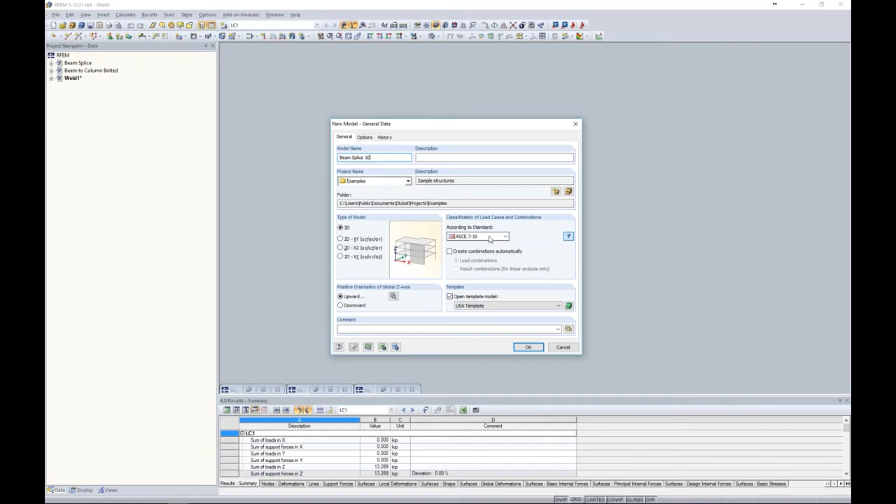To begin with, we want to start off with a beam splice connection. So I'm going to title this model Beam Splice 10. The type of model is 3D, and we can generate load combinations automatically here according to a specific standard. We're not so concerned with the load combinations and design today, so I'm just going to manually create a load case, and we'll just keep that pretty simplified. Once we click OK, then we can launch our new file, and up pops in the center here our graphic drawing or a graphic dialog box.

We also have our tables to work with down at the bottom. What's nice about this is that you can import and export directly to and from Microsoft Excel if you prefer to work with Excel spreadsheets. We do have our tools to work with up here at the top, and we will certainly be utilizing those today. Over on the left-hand side, we have our project navigator, which I think is a little bit more unique to our program. For example, the data tab, which we're currently looking at, will provide us with all of our input data. You can see our long list of add-on modules is listed here as well, which we won't be getting into today. The display tab is going to control everything we're viewing graphically within this window, including our results. So typically if you want to turn on or off something, or maybe change the color when you're looking at results or how it's viewed, everything will be done within this display tab.

Our views tab is where we can create user-defined views. As we begin to generate this model, we'll also have some views that are generated by the program automatically. And finally, once we run an analysis, we will have a results tab available here.

To begin with, we want to start off with a typical beam member for the first part of our splice connection. So I'm going to draw in a new member, and I will open up my cross-section database. We have our rolled cross-sections. Once I launch this, I will just see my AISC shapes listed here. I'm going to scroll down to utilize a W12 by 35. Now, steel A992 is one of the default materials within the program whenever we first create a new model, so we will just stick with this for now.

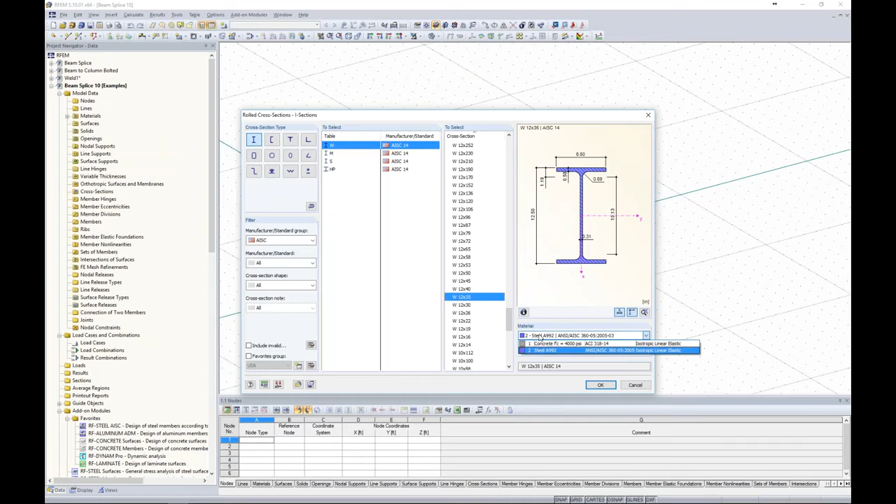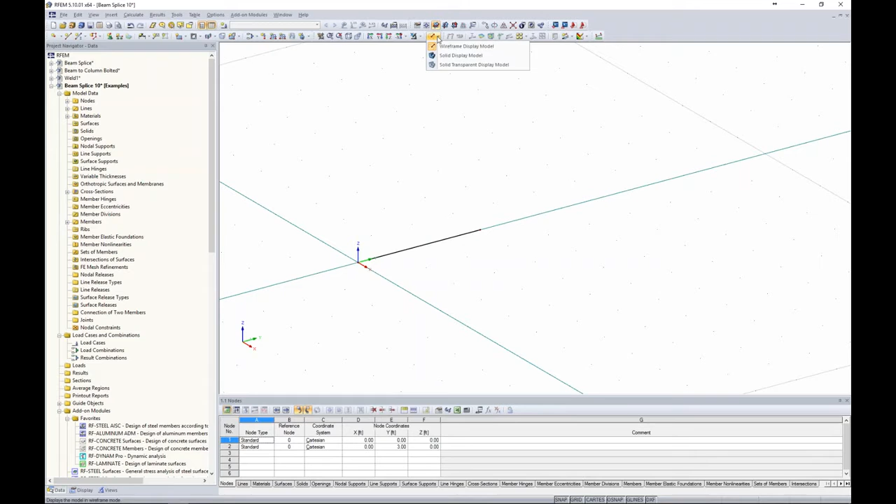By simply clicking on two points, one at 0,0,0 and the other at 0,3,0, we've created a short beam segment here. Now when I turn this into wireframe view, the thing to note is that members are 1D elements, so the wireframe view is just modeled by the center line. If we turn this back into a rendered view, of course all of these cross-sectional properties will be taken into account for the analysis and design.

But if we're interested in something like the stresses on the flange versus the stresses on the web, you really can't view those different stresses on different components of the beam because it's being modeled by this simple center line. Now what we can do is right-click on this member and utilize this option, Generate Surfaces from Member.

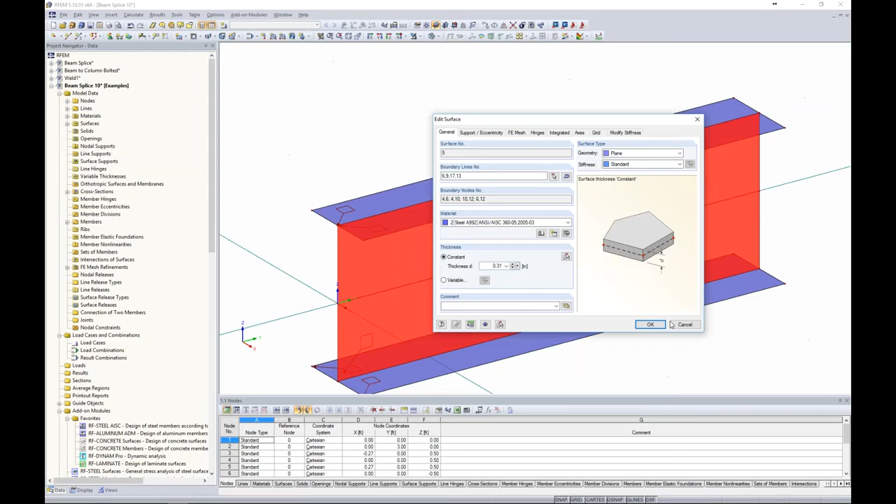So I've converted that 1D member element into 2D surface elements. We have a surface element now for our upper flange, for our web, and even the lower flange. When I double-click on the web, you'll notice that steel A992 is still populated, and even the thicknesses are taken directly from that W12 by 35. So this is a very useful feature when we want to generate surface elements from those 1D member elements.

Now the next thing to focus on would be our plate that we're welding this W shape directly to. I'm going to change around my drawing grid here, and we will snap to the front of the beam to change our origin, and we'll also change the plane here. Now when I look at my drawing grid, the snap points are set at every foot, that's just default. So down at the bottom of the screen, when I right-click on grid to edit it, you'll notice those grid point spacings are set at every 1 foot, as I just mentioned.

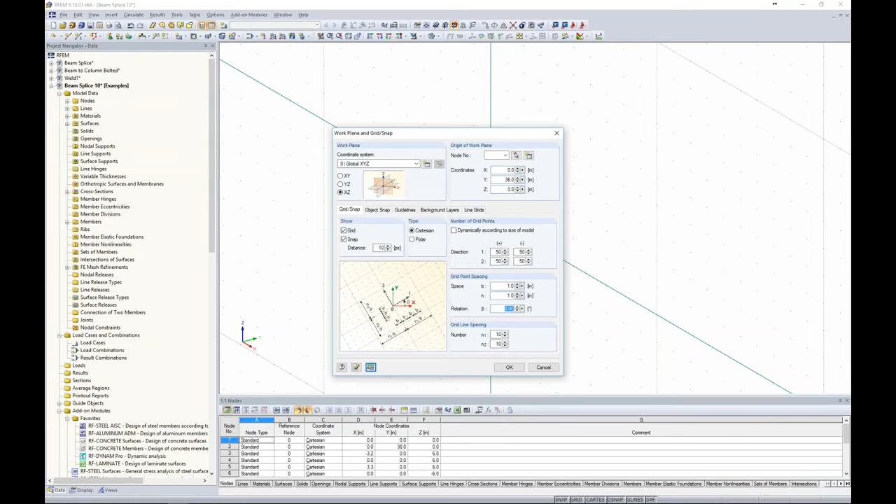We can open up our units options and automatically change this to inches instead. So now you can see that instead of 1 foot, I'm seeing 12 inches, and let's decrease this to every 1 inch. I click OK. So now you can see my drawing grid is much more useful when we're working on a much smaller scale, such as a connection. I'm going to orient the model here, so now we're looking at our W shape within the page, and we want to draw our plate element.

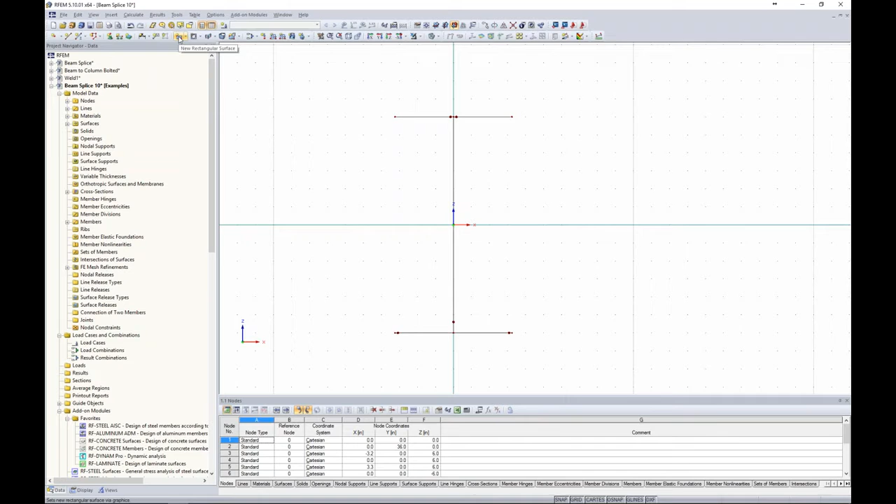I'm going to utilize this option, a new rectangular surface. So when I click this option, again this is a surface element, just like what we saw when we converted our 1D element into our 2D surface elements. I want to create a new material here, and using my filters over on the left, I can filter to metal, to steel, to the ASTM, and you can see here we have our long list of ASTM materials. Now I can also utilize a favorites group.

Favorites group is just where maybe I place a few of these materials, for example what I'm using in today's webinar, so that I can quickly have access to without having to sift through that long list. So steel A36 will be the material we select here, which the material properties are populated down here at the bottom so that we can view those. The thickness, we'll set this as 0.25 inches. I click OK. So all I'm doing is just snapping from one corner to the other, and I turn this into an isolated view, just a surface element.

So the next thing that we would like to do is to place those openings for bolts. Up next to these surfaces, we also have the option for openings within surfaces. And you can see here we don't have just typical shapes like a rectangle, but we also have circles, parallelograms. You can even draw in your own polygon. So this is very efficient when you have some type of odd opening within a surface connection, it's really no problem to model that.

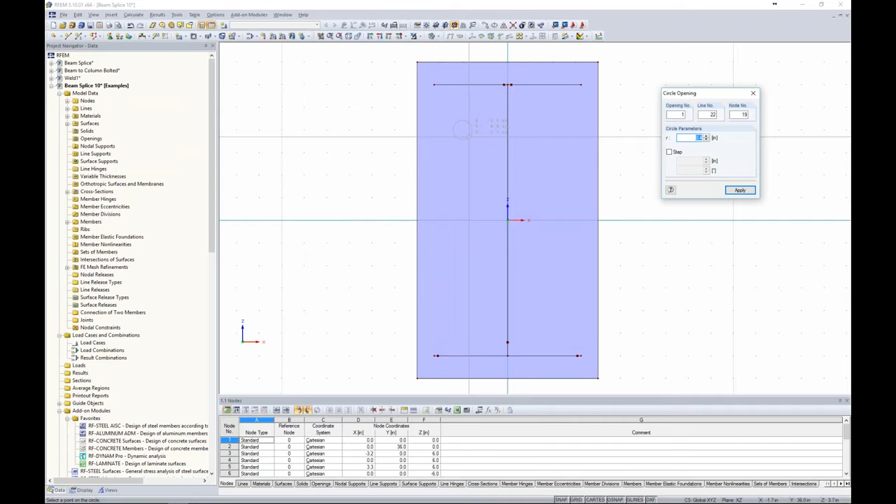For us, we will stick with a circular element though. So we just simply snap to the center line of that opening, and we can either snap to the radius of where we'd like to place that opening or type in 0.28 inches and click enter. So now that opening was automatically created within that plate element. I'd like to do the same thing at the bottom here, and I just snap to the center point, type in 0.28 inches, and I have the two openings on the left-hand side.

Now, zooming in here to this opening, realistically, we're going to draw a plate right next to this one with an additional beam. This is a beam splice. And in order to hold the plates together, I want to draw some bolt members that are going to hold those plates together when they're in tension.

Those bolt members we'll get into in just a minute, but what they're going to do is frame into right in the center of these openings. Now, they're 1D member elements, so the question is, how do we connect those 1D member bolts right here in the center to the rest of our plate surface?

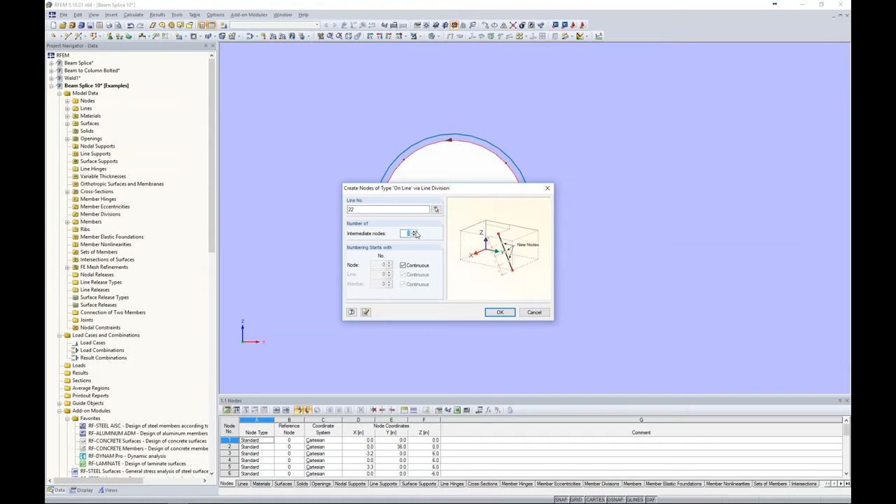Well, the answer to that would be small little rigid links. So what I can do is right-click on this line, and I can create a node on the line and intermediate nodes. Maybe I select 3 here. I click OK. So now I have 4 nodes located along the line of this opening.

I go to draw in a new beam member, and this time the member type will be rigid. You'll notice the cross section is automatically grayed out. That's because for a rigid link, the stiffness is set to an infinitely high number, a very, very high number, so the cross section is really irrelevant here. It's really treated as a coupling member.

But what we can do is adjust the member hinges. So when I create a new member hinge, you'll notice I have my 6 degrees of freedom, translation and rotation, but we also have partial fixity. So if we don't have a complete release or fixity of one of these 6 degrees of freedom, we can put in here a spring constant.

And lastly, if you would like to get into nonlinearities for any of our 1D member elements, you can do so. So if we didn't have a full transfer of a moment, but maybe we had only moment transfer up until a certain value, well, you can set all of that with these options here. For our case, we will leave this as fully fixed.

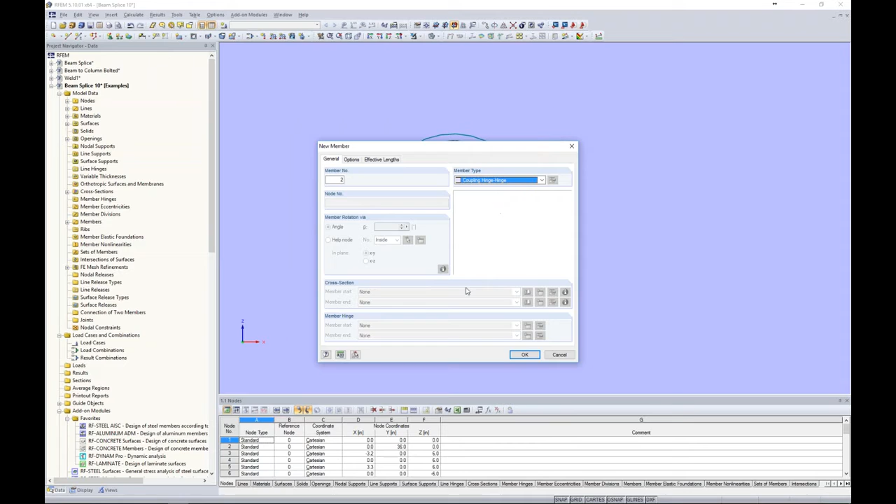Now, something else to point out is that we have quite a few other members down here called couplings. You'll notice we have coupling rigid rigid, coupling rigid hinge. When I select one of these, my member hinges are now grayed out, and that's just because these are some quick access tools to get to a rigid link with those member ends already defined. For example, a hinge would automatically release the moment at either side. So same process, just a little bit quicker so that we don't manually have to define these member ends.

Now, a rigid type with the member hinge set as none means that it's fully fixed, and we can simply snap to the center line of this opening to those 4 nodes that I created. Now, in reality, you would maybe want to create several more rigid links here, but for example today, just keeping it simplified, 4 will be plenty.

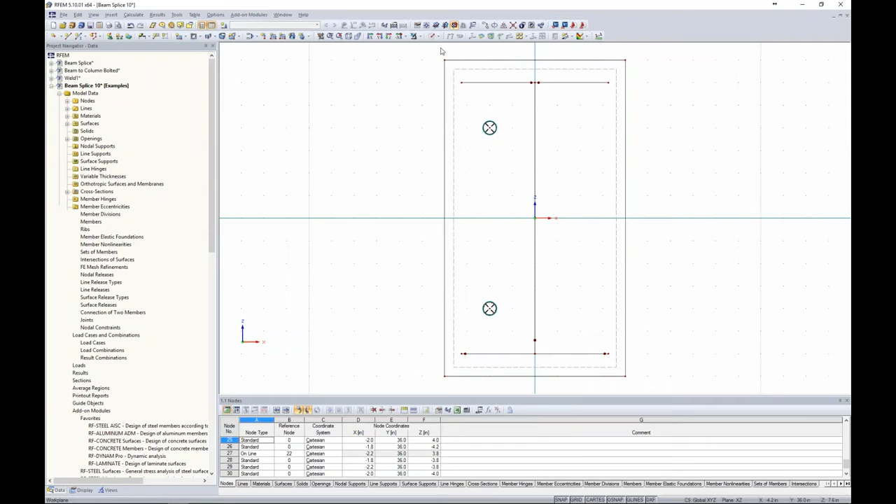So what we can do is highlight those 4 rigid links, hold down our control button, and simply snap to our bottom opening to create the rigid links within the bottom there. So now that we're done with the 2 openings on the left, I can turn this into wireframe, select both of those openings, and once again, just making a quick copy, I hold down my control button and utilize the drag and drop feature to make the other 2 holes on the other side. And turning this back into wireframe or rendered view, we can see those openings there.

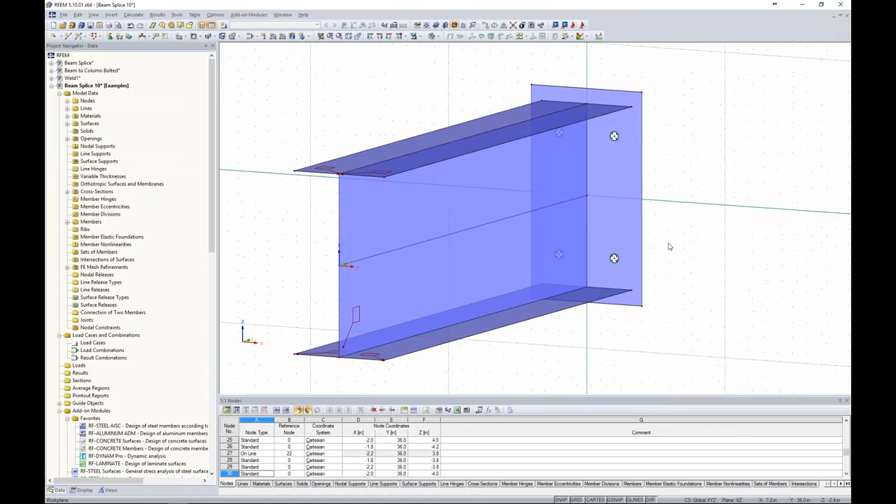Okay, so moving on, we currently have our 1D or 2D plate element drawn here. What we'd like to do is convert this into a contact solid. So the first thing I would like to do is right-click on this member, and we have this option to extrude the 2D surface into a 3D solid.

So here I can type in the height of the solid. Now this is important. If I have a 0.25 inch thick plate on the left-hand side and a 0.25 inch thick plate on the right-hand side, the height of my solid needs to be the sum of those 2 thicknesses. So in our case, this would be 0.5. Now in turn, if you had a 1/4 inch thick plate and a 1/2 inch thick plate, well then that would be 0.75. So you just want to add those 2 together to come up with the total height when we're looking at something like a contact solid.

The other thing to notice is that we do have the surface type selected here where the extruded surfaces will be set to null. So once I hit apply, let's take a look at what the program has done here.

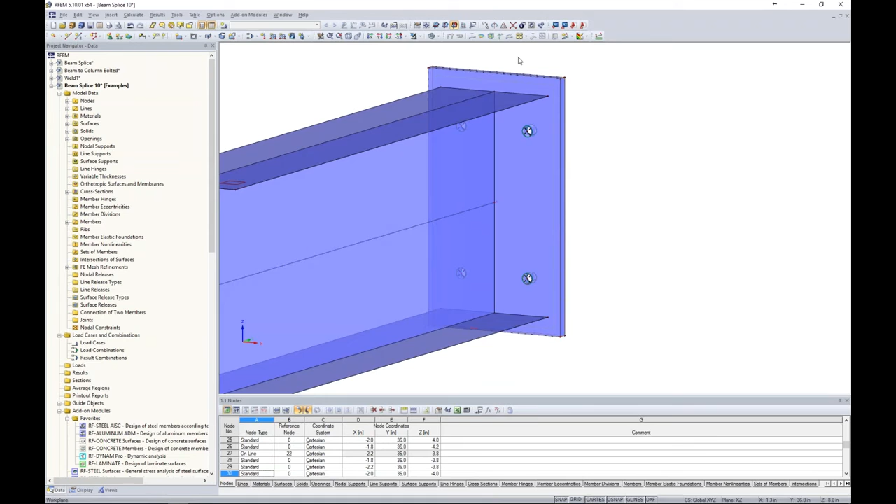It's created a solid element, so now we have a 3D element rather than a 2D element. We can see that those openings were carried through. That's all great, but when I'm looking at my surface elements, the solid is comprised of surface elements on every end.

And that plate that we just defined, if I double click on it, it was automatically set to null. That's what that checkbox did when we extruded this into a solid. So we want to change this back to standard, and we've already defined steel A36 within the model. The thickness is remembered at 0.25, so I click OK.

Now the exact same process needs to be done on the back side of this solid. So selecting my back surface element here, we're going to change the stiffness to standard. Steel A36, 0.25, that's great.

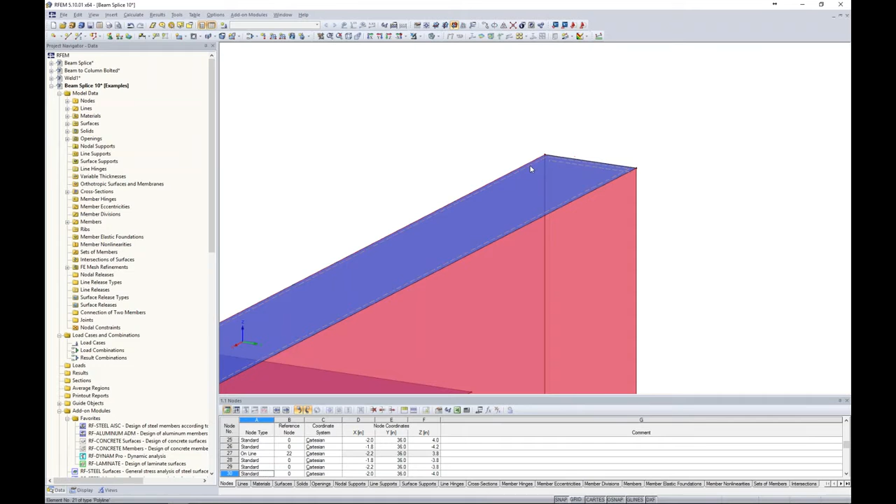But you'll notice that at the top, these narrow sides, I still have my surface elements here defined as null. So around these smaller edges, we're going to keep all of those with 0 stiffness.

So we currently take a look at this solid, and it's indicated, if we turn this into wireframe, it's probably a little bit easier to see by this purple node right here in the middle. We can double click on it, and you'll see here the solid type is set to material. So this just means it's a typical 3D element within our finite element software.

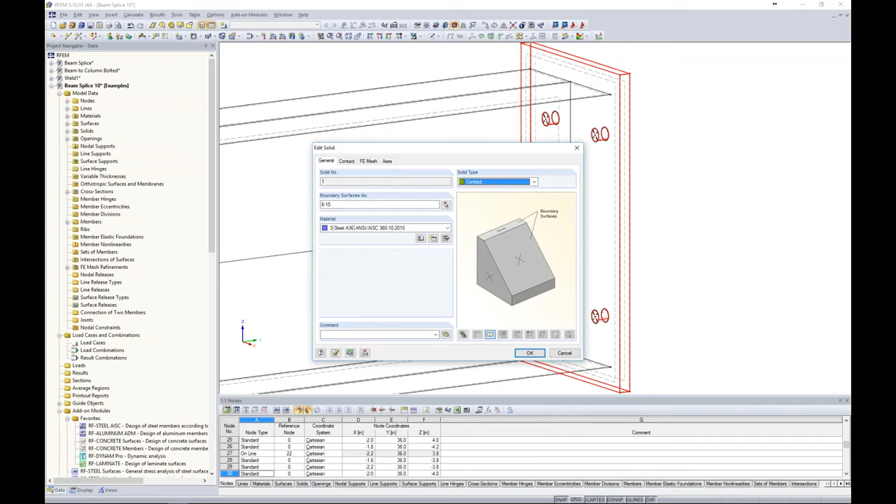What we would like to change this to is a contact solid. So we just utilize this drop-down box, and now we have a contact tab here. So I want to jump back to the PowerPoint to discuss a few recommendations and requirements for contact solids.

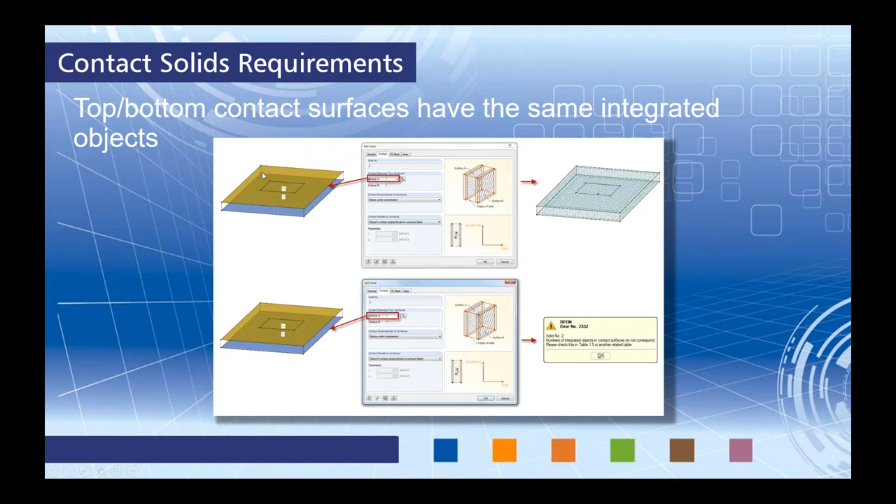So going back to RFEM then, what does this mean for us? Well, if we take a look back into the model, you'll notice that we have these line elements here, which are shown from framing our surface elements from our W shape.

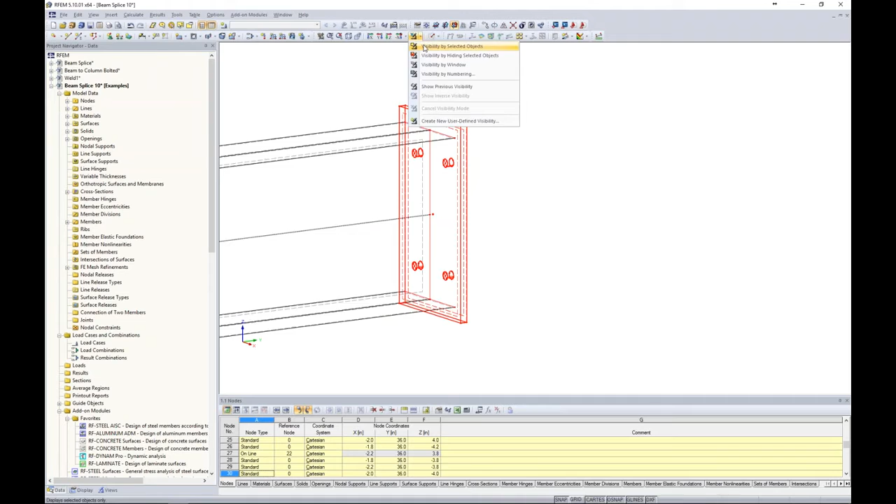Maybe I want to take a look here of just the plate elements, and we'll make a visibility here just based on these selected objects. So what I need to do is I actually need to copy these same exact elements to the back side of my surface. So I can do so by selecting them here, by highlighting, and I can hold down my control key. I even need to make a copy of that center node right there.

So taking all of these elements, then I can rotate this around, use my Move Copy tool, and I can make one copy in the global Y direction of 0.5 inches, and I click OK. So now you can see those lines and nodes are identical on each surface.

This plays no part in the fact that these surface elements are out here for my beam, but if we didn't have a completely symmetric connection here, this is what you would need to do, otherwise you will get an error.

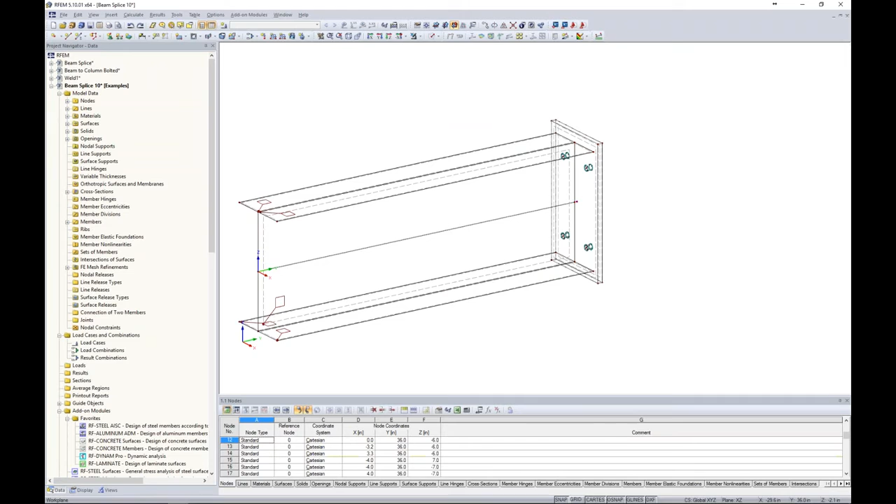In contrast, we're going to make a copy of this beam on the left-hand side to the right-hand side. We can select all of these elements and utilize our mirror tool, exactly like what you would see in AutoCAD. We'll create one copy, mirror it about the global XZ axis, and graphically choose a point in the center of our plate to mirror that. We click OK, and now you can see that those lines and nodes were automatically generated when we mirrored our entire beam section to the other side.

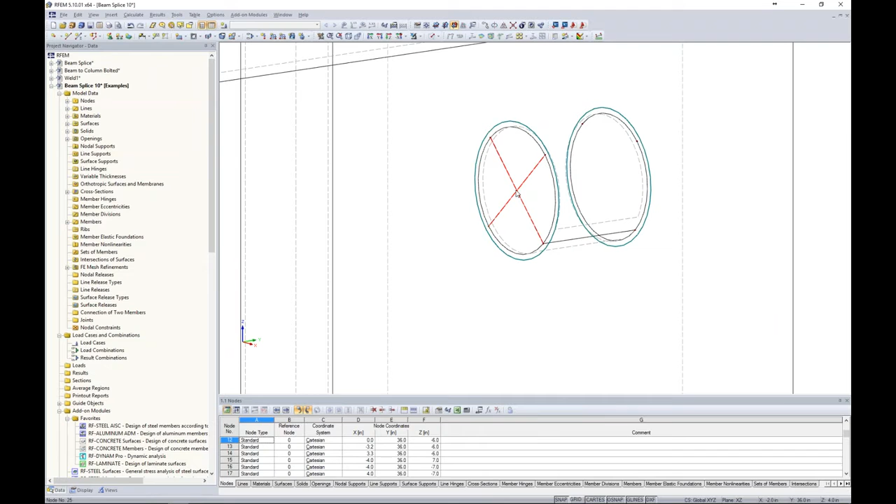A couple other things to note here. If we zoom in, it looks like our rigid links were not copied over when we extruded this into a surface. Well, that's no problem. All we need to do is highlight those, hold down the control key, and snap to the other side, doing so with our opening on the right-hand side. For the bottom, we can even select both rigid links on the left-hand side, hold control, select on the right-hand side, and drag and drop to do both holes at once.

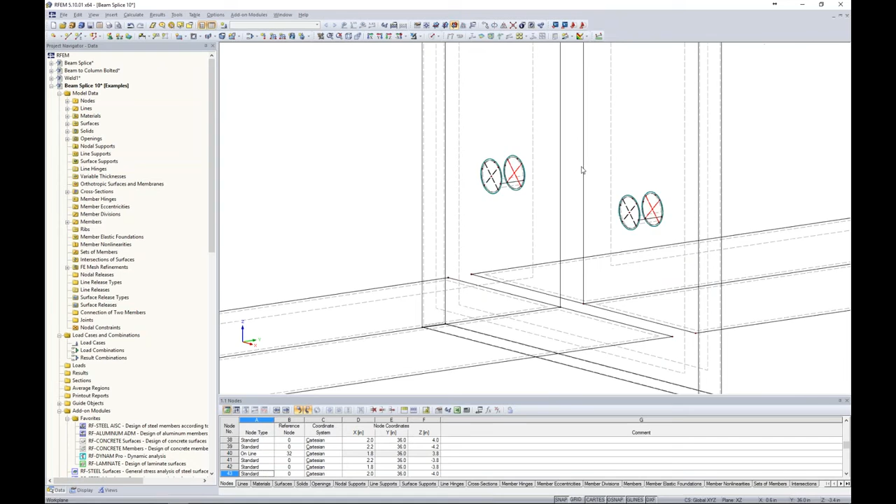So we had those rigid links drawn, but we've done nothing yet to model our bolts. This is where we're going to go back into our member database and select a typical beam type member for our bolts.

I want to create a new cross section by going into my cross section library, and under my thin walled sections, I have the option for a round bar. With a round bar, all I want to do is define a diameter of 0.5 inches. This is representative of my bolt diameter.

I do want to create a new material, so utilizing my favorites group again, I have added steel A325 to my material database. This was a user-defined material where I've adjusted my properties to match steel A325 directly from the AISC or the ASTM. I click OK.

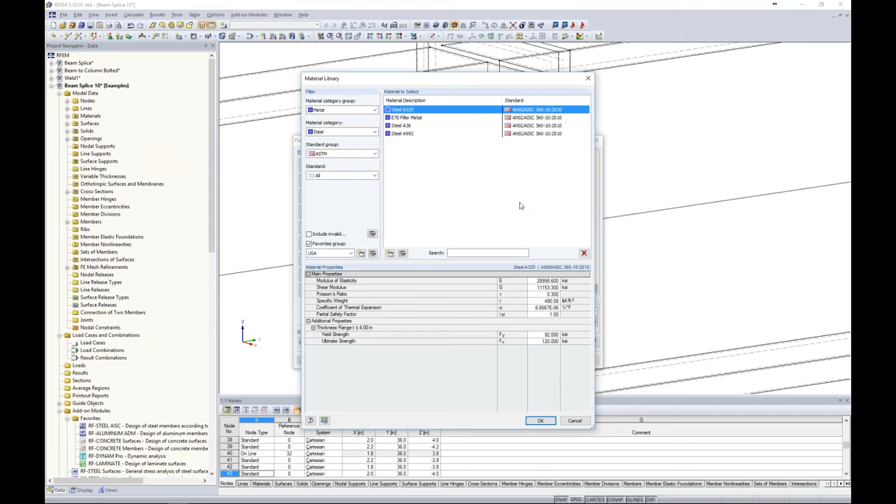I click OK again. Now the member hinge, I'm going to leave these as fully fixed. I'm going to assume that the bolts and nuts are tightened such that I'll get some moment transfer between those bolts holding those two plates together.

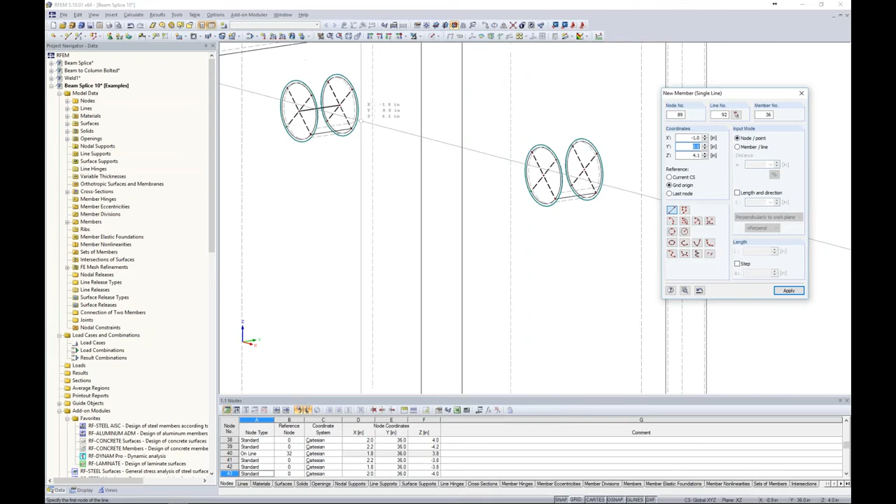I click OK. Now all I need to do is snap to the center points here between my rigid links. So hopefully it's a little bit more clear why we created those rigid links in the first place, in order to tie these bolts back into our surface elements.

Once I'm done with this, I can right click to exit that dialog box, and let's take a look at the rendered view. So now with our openings, those are still shown here, but the rendered view of our bolts shows that circular short member in there to represent the bolt members.

Okay, so now that we've pretty much modeled all of the geometry, the next thing we want to do is discuss the behavior of our contact solid. Double clicking here back to our solid, remember that under general we specified the solid type as contact, so now we have a contact tab available here.

The program automatically determined what surface A and surface B should be. These are our 1/4 inch thick A36 plates. Sometimes you may have to come in here and manually define this, just depending on the modeling steps that you take, but most of the time the program is smart enough to recognize what surface A and what surface B are.

Now the next two entries are going to define the behavior between these two surfaces. The first is the contact perpendicular to the surfaces, and for this we have three options. The first is full force transmission, where all of our normal forces and stresses are going to be fully transmitted between surface A and surface B. The second option is failure under compression.

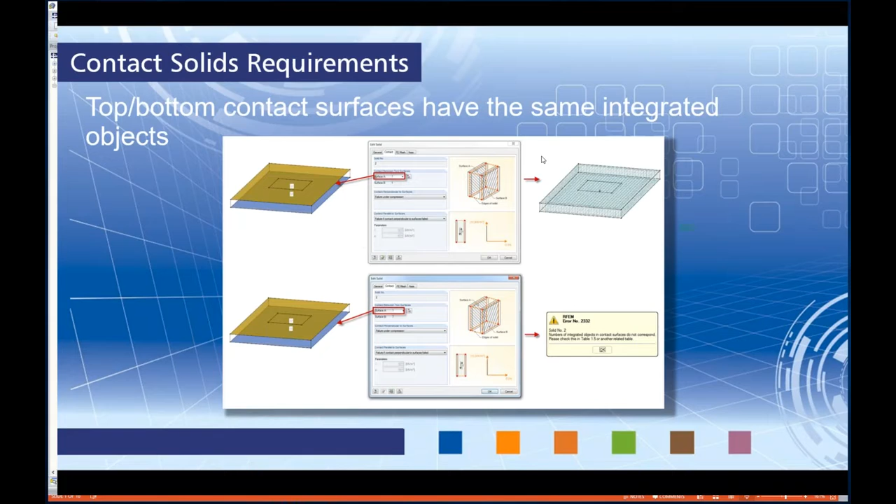The first option is failure of contact perpendicular to our surfaces. So we just set the option for the perpendicular behavior that it would fail in tension, and the option parallel to surfaces then would also fail whenever we have tension within our plate. It's just a relationship between those two behaviors.

Full force transmission - this means that all shear forces will be transmitted, despite whatever is going on normal to our surfaces. We'll always have full transfer of those shear forces.

Rigid friction is what we'll be utilizing today. This is where we'll be given the option to enter a friction coefficient factor mu. As we know, shear forces can sometimes be dependent on our normal forces times our friction factor mu, so that's what we'll be utilizing today.

The fourth option, rigid friction with a limit - same type of concept, however we're no longer given the option for a friction coefficient factor, but rather a tau max. What this is saying is that we will have full force transmission between the two surfaces up until a certain value, tau max. At that point we'll lose that contact and won't see any increase of those shear forces or stresses.

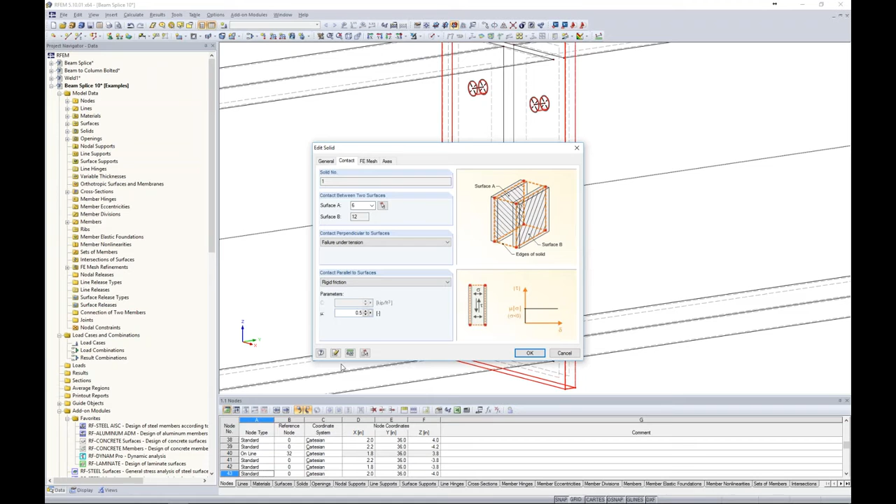Going back to the model, when we take a look at our particular model today, we have failure under tension. And as I mentioned, we will choose rigid friction here. To emulate these two steel plates sliding against one another, we can use something like a friction coefficient of 0.5, and I click OK.

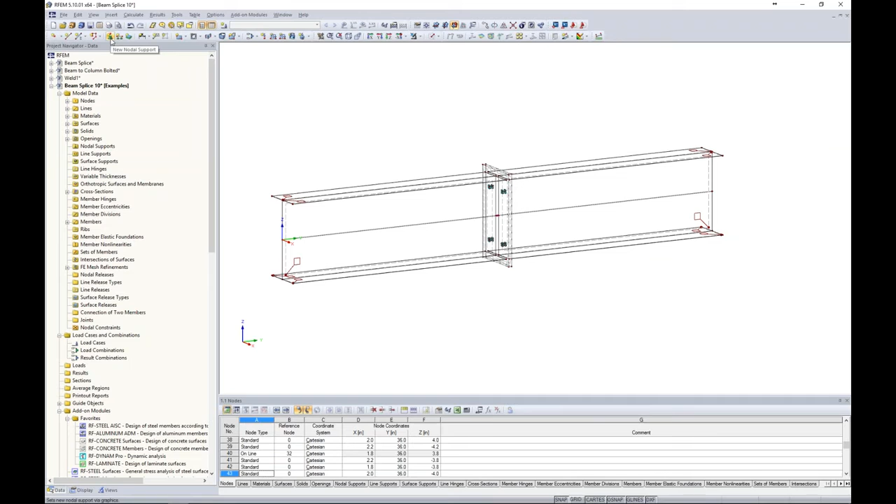So now we have fully defined the behavior between these two plates on the left and right hand side with a contact solid. A few other considerations of course before we're able to run an analysis - the first one is we need to support the model. We have nothing here such as a nodal or line support. You can see our support options shown up here in our tools: nodal support, line support, and surface support.

If we open up the nodal support and create a new definition, this should look familiar - it looks just like what we saw at our member ends. We have our 6 degrees of freedom, translation and rotation, where we can fully release these or fully fix them. We have spring constants here for partial fixity, and again we can get into nonlinearities.

This also allows us to define things like slotted joints - maybe we want this beam to slide up until a certain force and then it will be fully fixed. So all of those options are possible with the nonlinearities. Now for today, we are going to stick with a simple hinged application, so I can simply draw a selection box over the left and right hand side of this beam member.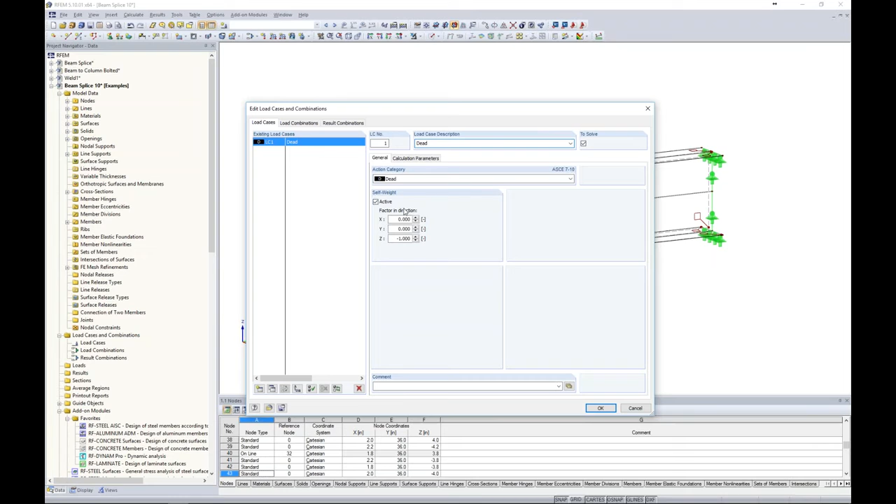The next thing to do would be to load the structure. For this I'm going to go up to my new load case, and like I said, we're going to keep this fairly simple for today, only defining one dead load case. I will leave the self-weight activated, so it will automatically be taken into account with this particular load case.

Now the next thing we'd like to do is apply a line load across one of these members. Intuitively we'd think, okay, let's apply a member load. But remember, we don't have any 1D member elements within this model anymore. We've converted everything to surface or solid elements, so line elements for surfaces or solids must utilize this new line load.

With a line load, we simply specify the load direction in the global ZL direction and give it a magnitude of -50 kips per foot. I click OK, and then I can click to the top of that beam member over here on my left. I think it's perfectly acceptable to maybe not have symmetric loading for this particular connection, but to really see when we have unbalanced loading. So I'm just going to apply my load to my left-hand side and leave the right-hand side without any load except for self-weight.

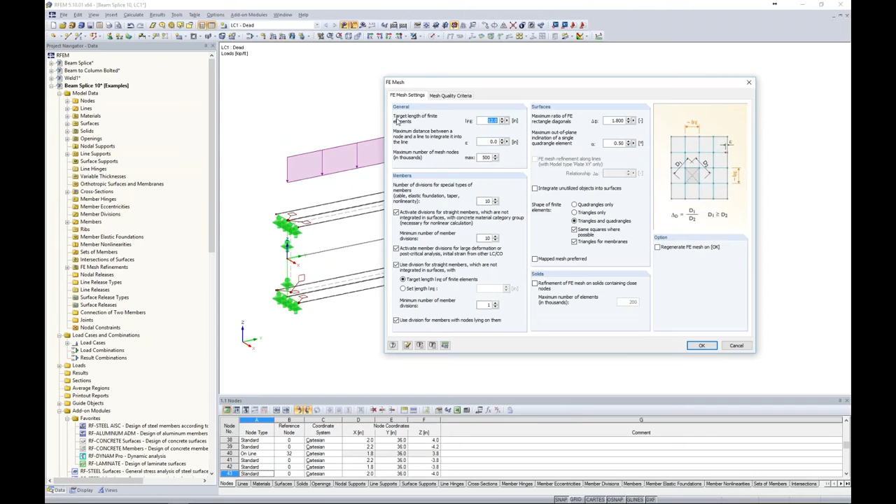The final thing to look at would be our FE mesh. Under calculate FE mesh settings, the global FE mesh is always set to 12 inches or 1 foot. Now, the program was smart enough that when we converted these 1D member elements into 2D surface elements, we are at a much smaller scale now, so it automatically recognized that 12 inches was entirely too big for this FE mesh for these particular elements. That's why it applied these little symbols over here. These symbols just mean FE mesh refinements.

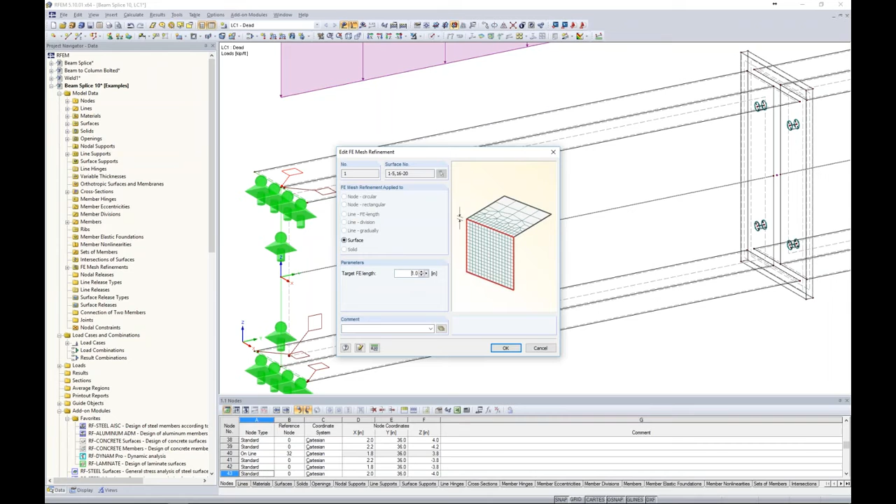If I take a look by editing what the program automatically put in here, you can place FE mesh refinements about a particular node, a line, a surface, or a solid. Now we're applying this directly to the surface here, and the program automatically decided that 1 inch would be much more reasonable than 12 inches.

If we take a look by going to calculate, generate FE mesh, we can see that the program automatically created the FE mesh even at our plate elements where it's required to be much smaller than 1 inch. Everything is done automatically. It's tied to the nodes, the lines, the members. Everything is done for us. But what I do want to show you is that our FE mesh refinements are listed here under our data tab in our project navigator.

So if I were to take that FE mesh refinement that I just showed you and completely delete it by just hitting delete on the keyboard, and let's say we didn't know any better, but just leave the FE mesh settings set at this global mesh, which is currently set to 12 inches. Choosing this option here to regenerate the FE mesh, once I click OK, we can take a look, and I think we should all agree that this is a terrible FE mesh.

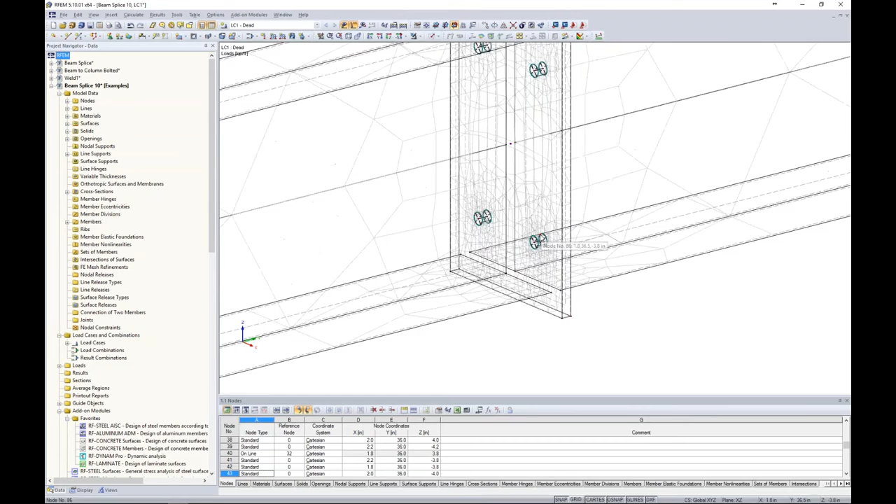This simply will not provide you with correct results because the FE mesh is entirely too big. The program does a little bit of a better job within the contact solid, just because we have elements much closer than 12 inches that it needs to tie together, but out here you can see it's entirely too big. So rather, what we can do is under calculate FE mesh settings, we can change the global FE mesh settings to something more like 1 inch. I click OK, the FE mesh is generated and everything looks much cleaner.

Now there is an iterative process with this. You can continue decreasing your FE mesh size smaller and smaller, and sure, your results are only going to be more accurate. But at some certain point, you're going to be increasing your solution time to be very high in comparison to how much your results are actually changing. So get a better feel for this as you begin to model in finite element software more and more.

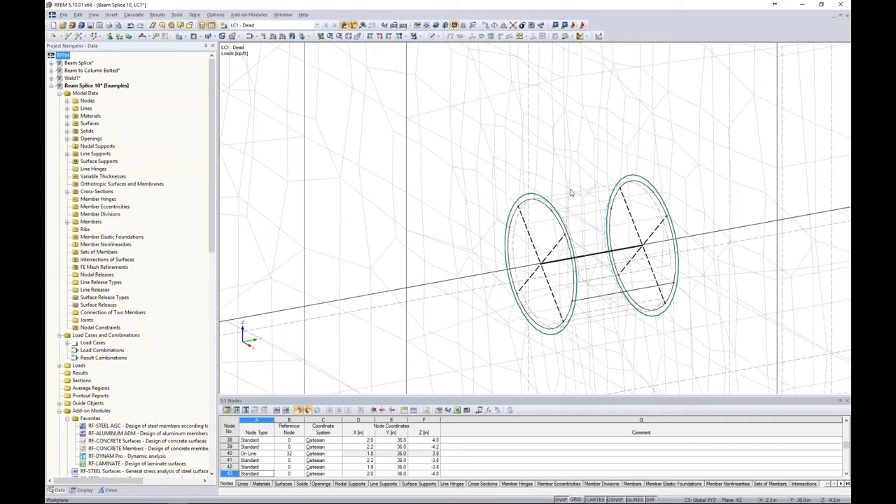The other thing I wanted to point out quickly is just another FE mesh refinement. So if we're zooming in here to one of our openings and we determine we'd like a finer mesh than what's shown here, we can always right click on any one of these elements, and here's where you'll see the option for FE mesh refinement. We choose new, create a new definition type, and now you can see my FE mesh refinement is shown for lines. So maybe my target FE length would be something like 0.1 inches, and I'd like to have 4 layers, and it will transition back into the global 1 inch setting.

I click OK, I click OK. Now the FE mesh was cleared, and I can see my FE mesh refinement symbol, which is noted by these nodes across my line.

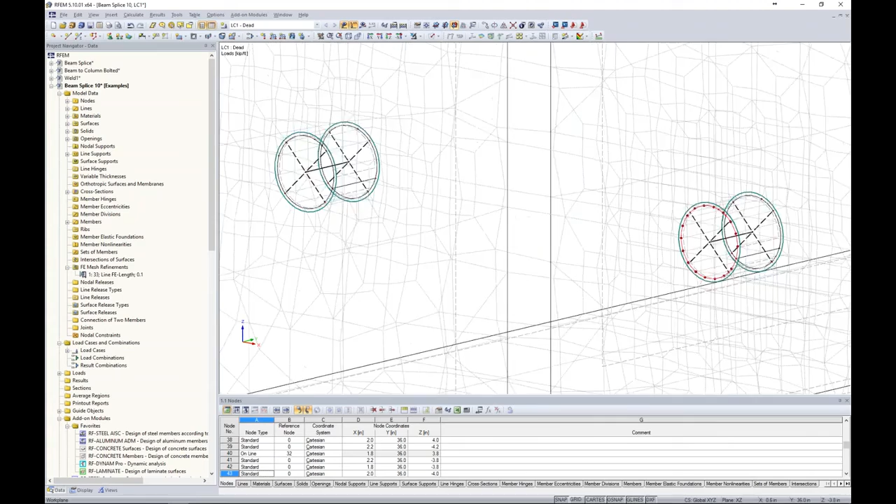Going to calculate and generate the FE mesh. We have a much finer mesh on the right-hand side than on the left-hand side. These are just different options for FE mesh refinement to focus in on a particular area within the model, rather than changing our global settings to something much too small, which really increases solution time.

With that said, I think we're finally ready to run our analysis. The program is going to cycle through this load case, and we've only applied this dead load. A couple other things to keep in mind: this is a nonlinear analysis, so internally the program is going to create these FE elements.

It's actually taking quite a bit of a long time, usually not this long. We can see down here what the program's doing - it said verifying authorization, so it was checking my license. It's a nonlinear analysis program, so the contact solid is going to increase our solution time as well, because of the different behavior we defined between the two plates.

So the analysis has run, and we're automatically brought into our results tab, available within the project navigator I mentioned at the beginning of the webinar. I think the most important thing to automatically take a look at is deflections. Deflections will really show us if we've correctly defined our contact solids, maybe our FE mesh, and if it looks about what we would approximate.

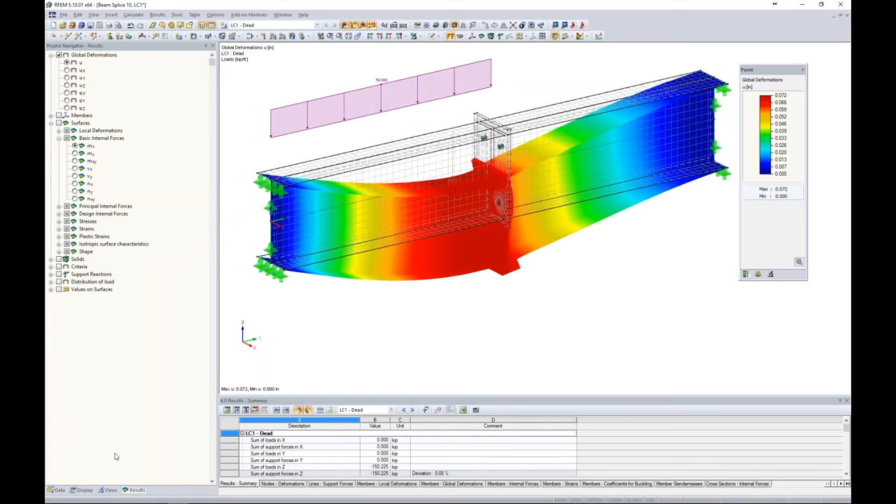It's a little bit difficult here to see our deformations and what's going on. So under our display tab, we have this whole results tree, and under deformation I can actually choose this option to outline my deformed surfaces. Now it's a bit more clear what's going on with our beam elements, our plate elements, and even our openings are shown.

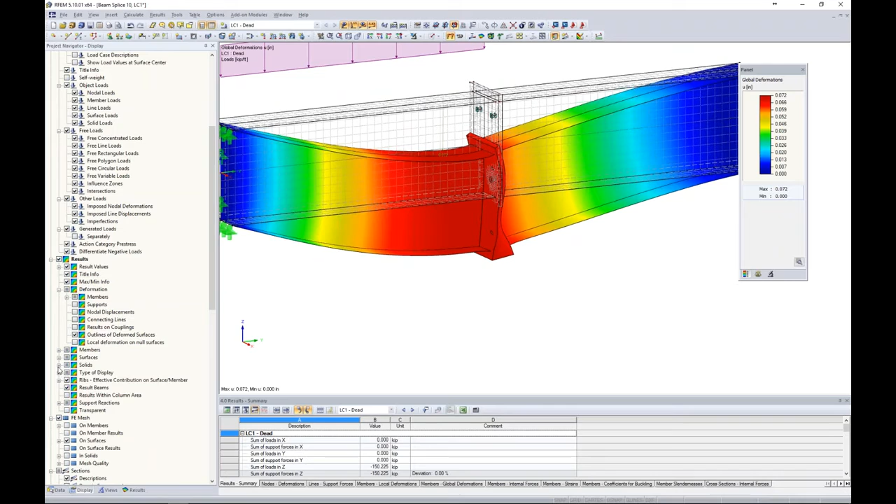The other thing to note is that under our solids tree, we have a feature called remove contact solids from display. When I activate this, my contact solid is no longer shown, and I can see truly what the behavior is between those two plate elements.

Just as we defined, when we have tension, it looks like the contact between those two surfaces is failing. But as we move up the length of those plates where we have compression, those two plates are acting together. You can even see our bolt elements indicated by these lines here - they're pretty much keeping the plates together in terms of those tension forces.

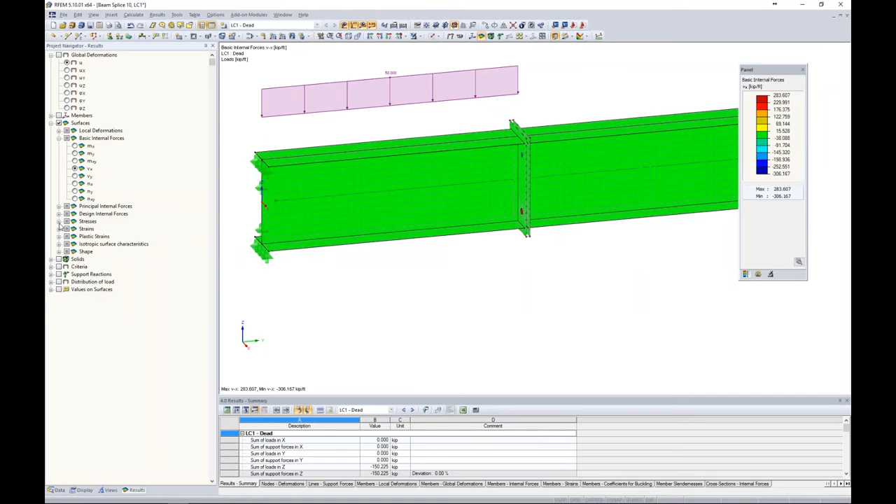What we're probably also interested in under the results are our surfaces, and we can view internal forces such as contour lines, but maybe we'd like to take a look at our stresses. When we take a look at von Mises stresses, there's a whole lot of blue going on here, so I'm going to make a selection of just my plate element, visibility by selected objects.

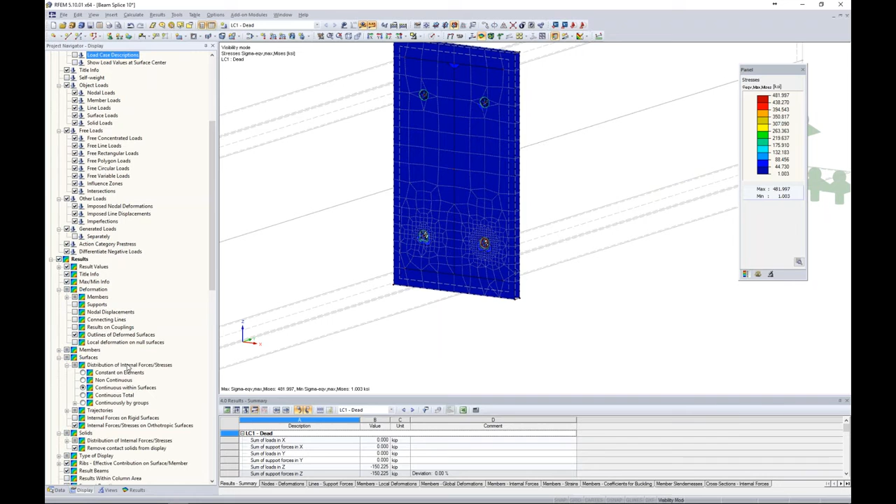The first thing I want to note when looking at stresses, especially on a small scale like that, is to jump back to our display tab and change one of the settings. Under surfaces is the distribution of internal forces and stresses - I'm going to change this to constant on elements.

Now when I zoom in, each FE element has its own average value. What was happening before is the program was trying to use a smoothing algorithm to tie all of these together, and you get maybe less than accurate results in terms of our color panel. The results are still accurate, but how it's presented is much different than averaging it out over each FE element.

We certainly have some very high stresses here, 481 KSI. I would attribute most of these to singularity issues, so again maybe we'd want to add in some more rigid links. There are ways to smooth out these singularity issues.

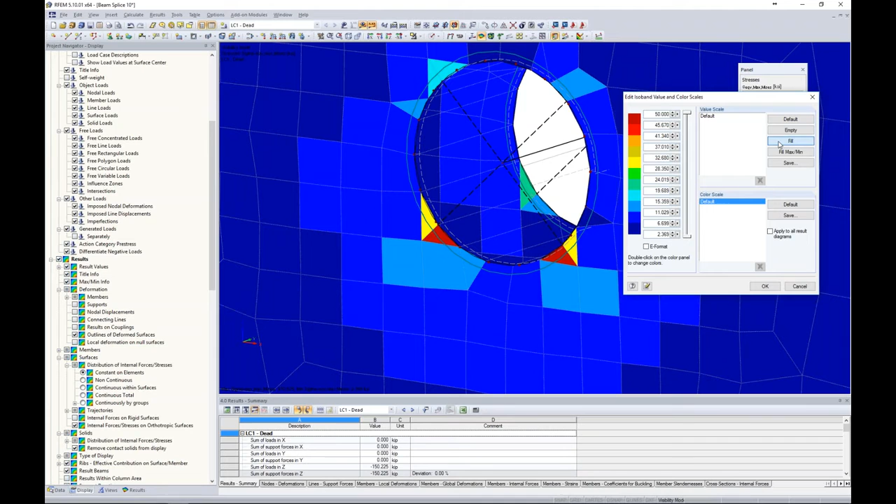But if we're more interested in results without these very high stresses at single FE elements, what I can do is double click on my color panel and change my upper limit to something more like 50 KSI. I can choose the fill button, then click OK, and now I'm seeing results that are a bit more useful for what's going on with my plate elements.

So we certainly still have very high stresses - 50 KSI is over the yield strength of our steel A36 plate.

So maybe this is where we size up our plate, or maybe this is where we move on to a plastic analysis with nonlinear materials. I did a full webinar devoted to a connection such as this, going into detail on plastic analysis as well, called Advanced Steel Design per AISC, which is on our YouTube channel if you want more information. But that's just something to keep in mind in terms of these high stresses we're seeing.

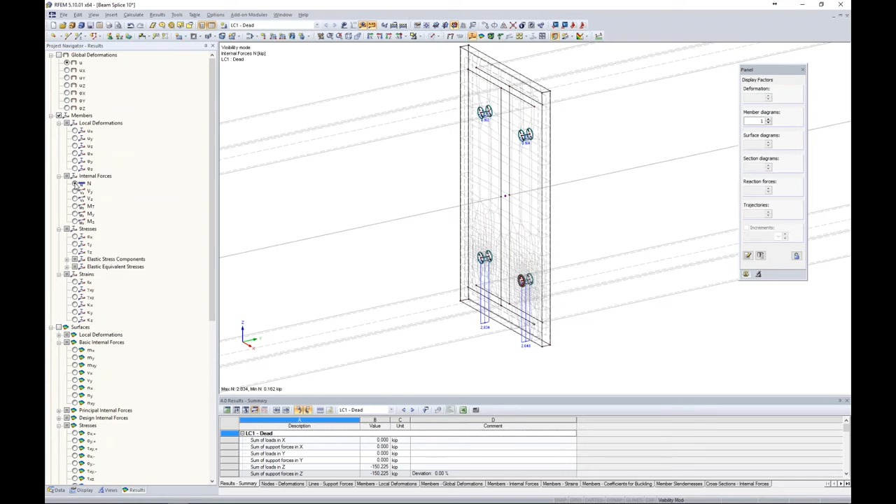The other interesting thing under our results is to turn off our surfaces and instead take a look at our members. Remember, we defined these little bolt elements as members here, so we're able to see these tension forces, which are much higher at the bottom of our connection opposed to the top.

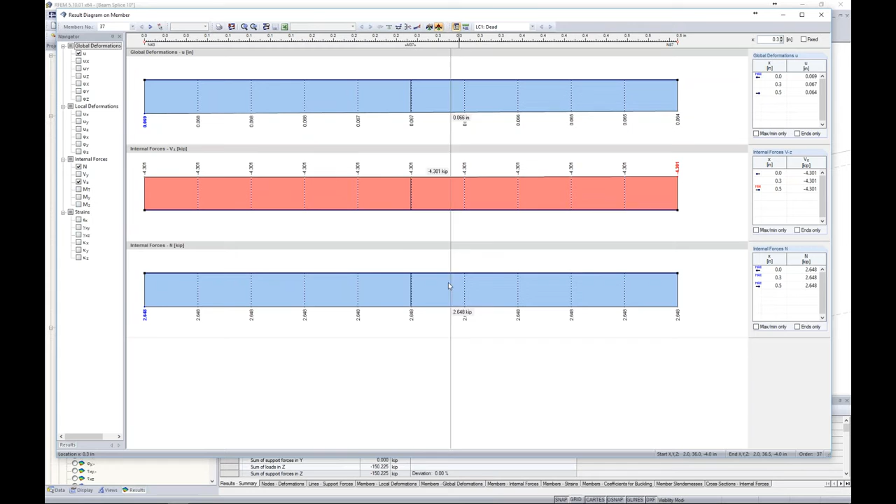We can also take a look at shear forces, zoom in, and if we right click on any one of these members, we can view the results diagram to get more information on the magnitude along the length of these small bolt elements. So if we're designing this connection and want to see the forces on the bolts, that's all possible. That sums up the first example here in terms of a contact solid.

Now this was a completely symmetric design, which was very nice, but we all know that typically isn't the case. So what do we do when we don't have complete symmetry when looking at something like a contact solid? For this, I want to jump into my saved model, a typical beam framing into a column. I went about it the same way, converting 1D member elements for my beam, my column, and my contact solid for my plate element, but there's something slightly different here.

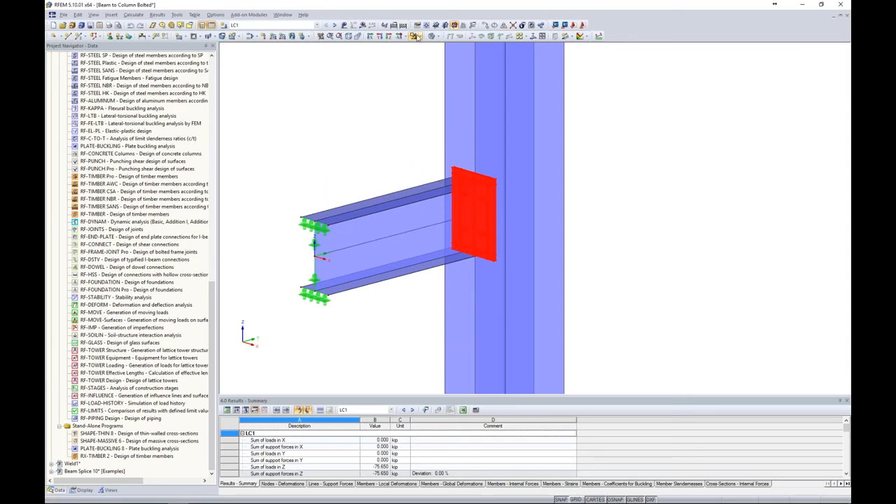Again, we don't have symmetry on the left and right-hand side of this plate anymore. So making a visibility view based on my plate only, turning it into wireframe, and changing the viewpoint, here is my plate looking into the page of my beam. You'll notice I have 4 contact solids defined at the top, 4 in the middle, and 4 at the bottom. The reason is simply because I didn't have as much symmetry as our last model, so I had to create these smaller contact solids to meet the requirements.

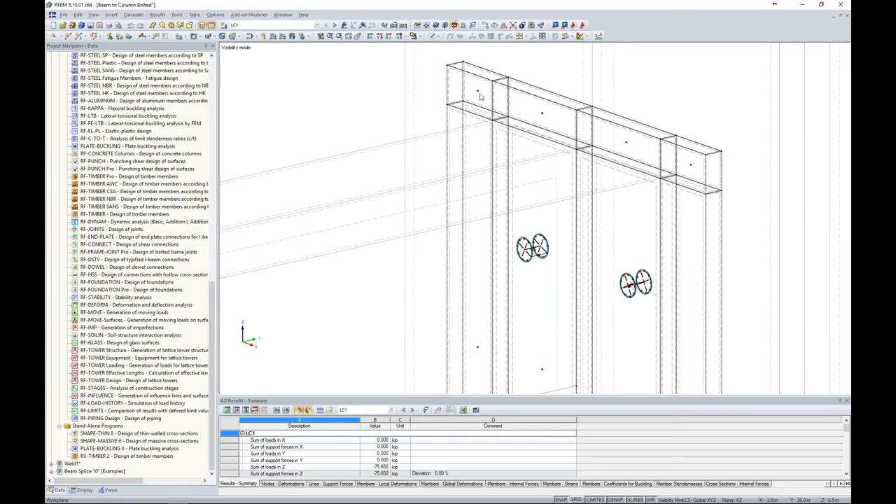The requirements being that each contact solid must be comprised of 4 different lines, and contact solids must have identical integrated objects on surface A and surface B. If I take a look at all these contact solids defined side by side, both are highlighted at the same time, and we can set our behavior for them all at once. So again, I have failure under tension for perpendicular surfaces, and rigid friction defined for behavior parallel to surfaces, so this acts like one continuous contact solid. The point being, when you have anything more complex, split it up into several simpler contact solids.

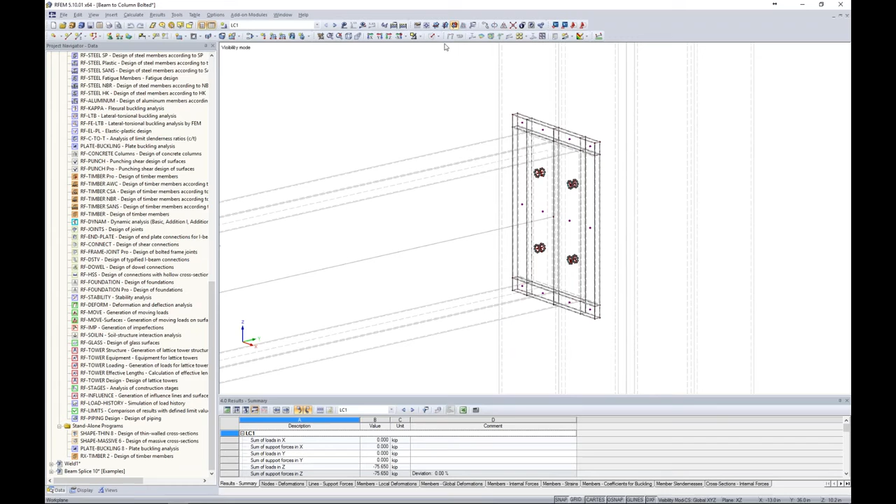So now when we take a look at our results, let me cancel out our visibility and turn on results. I'm immediately presented with my deflected shape. We placed this line load, turn this into an elevation view, zoom in, and it's doing exactly what I'd expect, where we have tension on this plate pulling away from the column.

As we move along the plate, in places where there are compression forces, that's where we should see the full interaction between the surface elements—actually we have multiple surface elements for these contact solids now. Here are my bolts in tension as well. Same exact concept—the only thing I did was split that contact solid into several simpler elements.

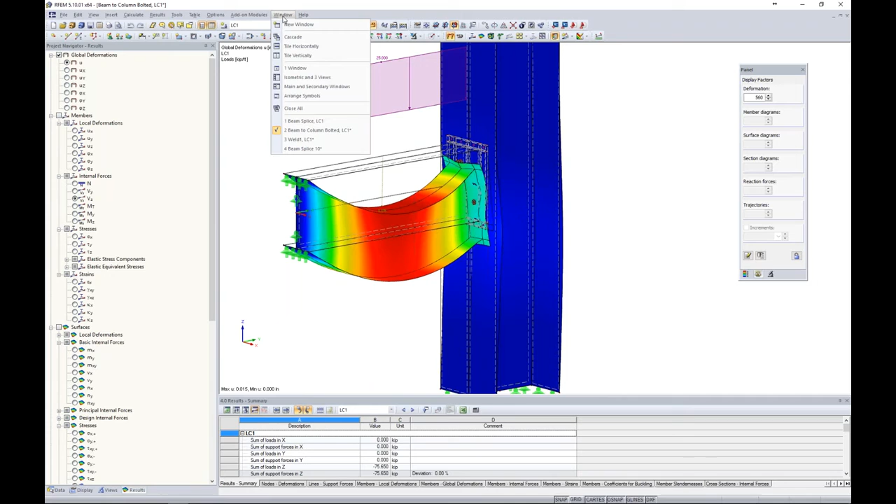Now we often get asked too, how do we take a look at weld connections? Maybe you're interested in some type of odd connection, or strange forces being introduced into a connection. Well, we can also do that with finite element modeling as well. So jumping into another saved model here.

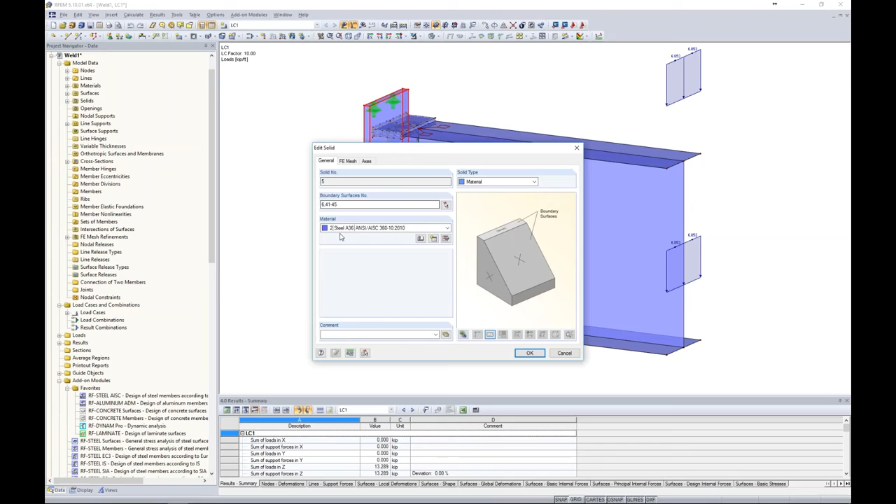This would be completely independent of contact solids—I didn't utilize any contact solids within this model, but let me explain what's going on. We have our W shape consisting of our typical surface elements that we've been through many times, and up here is my plate that my beam member is being framed into. When I take a look at this plate element, I no longer change this to a contact surface or contact solid—it's just a typical 3D solid with a material set within the depth of steel A36.

Now, all of those requirements for boundary lines and same integrated objects go out the window for a typical solid element. That's not required for typical solids, just only for contact solids. So you'll notice we have many different lines and elements framing into the front side of the surface A, but we don't have it shown on the back side.

So how about the welds? I created a user-defined view here, and I can turn this on to show my weld solid. Zooming in here, you can actually see the triangular shape of this fillet weld. Now, this weld is just another solid element—I double click on it, and the solid type is set to material, just like what we saw with our plate, except I changed the material. I added E70 filler metal to represent a higher strength metal for the weld here.

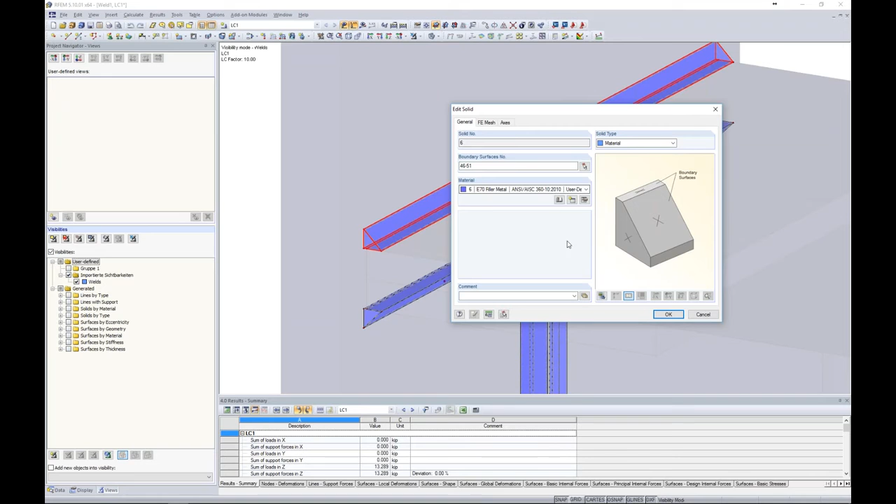So when we're looking at these solid elements for our weld, we have welds at the top of the flange, the bottom of the flange, and along the length of the web as well. If we cancel this visibility, you can see we have our 2D surface elements for our beam framing into there. But in order to accurately get our results for the stresses within this weld, I also converted the flange, the web, and the lower flange all to solid elements for this beam as well.

So again, a solid type material, steel A992. Now, I didn't have to create a solid element for the entire length of the beam, just purely at this connection where I'm interested in my stresses. And that's because we have this solid weld—it must frame into the solid plate, which also must frame into the solid flange and web.

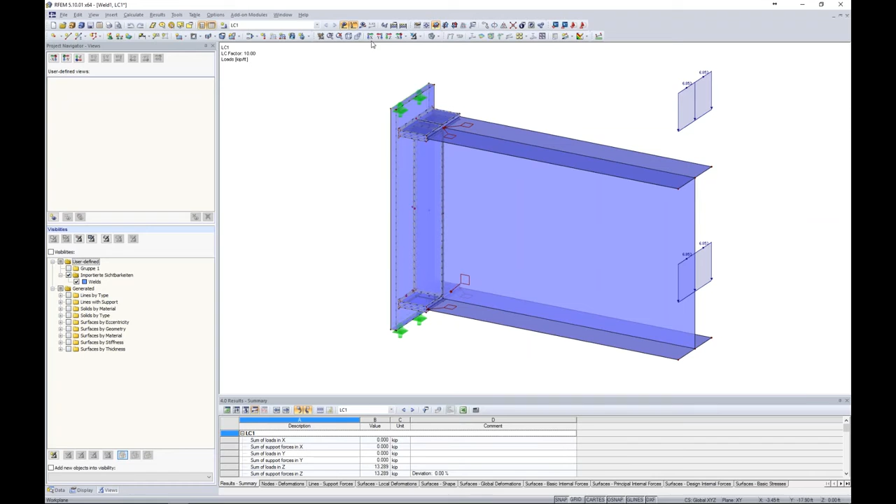So now when we've loaded the structure and run a simple analysis, we'll get our results. Again, we can view our surfaces—for example, our von Mises stresses might be of interest to us, maybe not so much out here. But now, unlike contact solids, we also have these solid results available here. Before, with contact solids, there was no way to view stresses because there really was no material for a contact solid, but now we just have a typical 3D element.

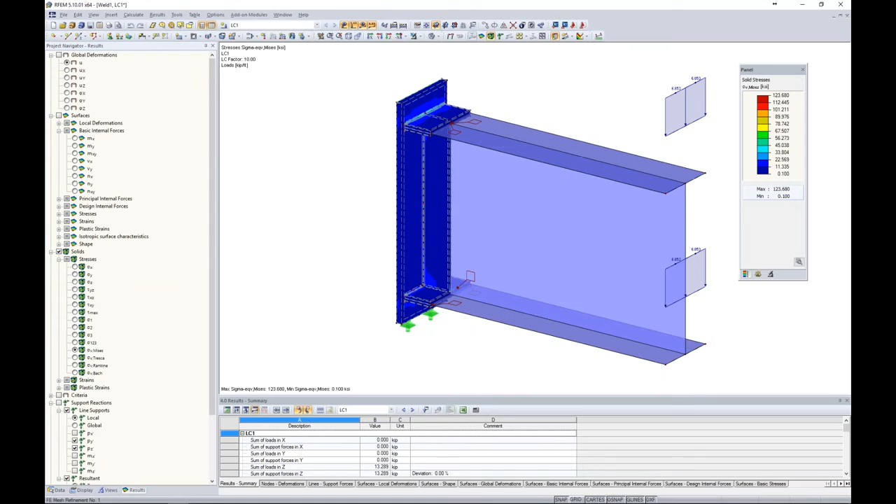So what I can do is go back to this view of my weld element, zoom in here, and currently I'm looking at my von Mises stresses. I can see points where maybe I have a really high stress—for example, this looks like an area where maybe I want to reconsider this connection, or maybe refine my FE mesh a little bit more. You can do so within this solid element for these welds as well. The point being that you can model the welds as typical solid elements, and then view all of these stresses, including strains and plastic strains if you wanted to get into that with nonlinear materials.

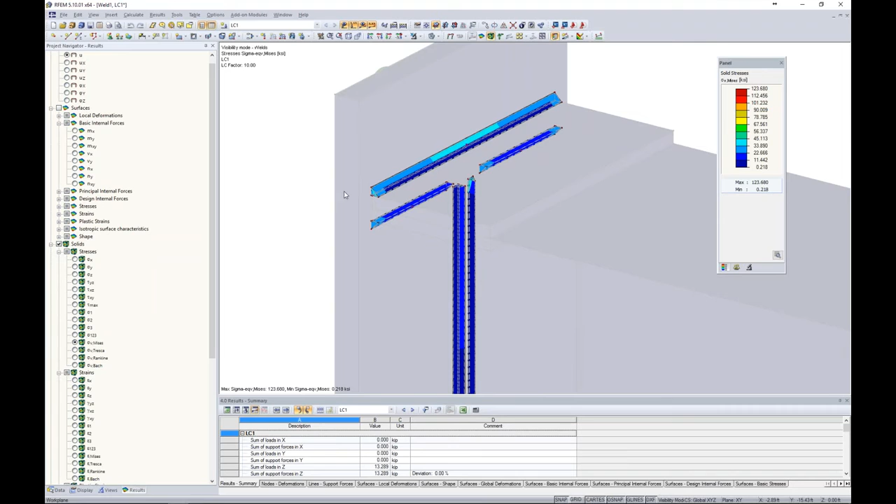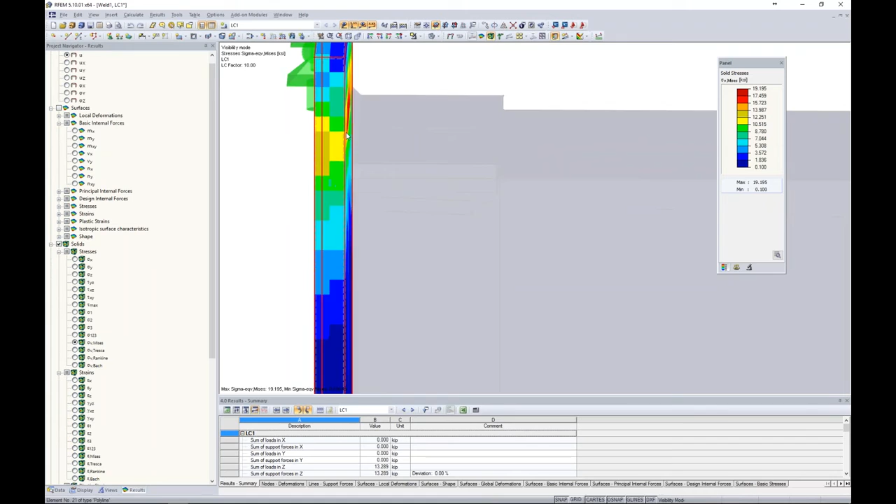So we can also take a look at our plate element. Let me cancel out of this visibility mode. Maybe we select just our solid, create a visibility by selected objects, and view our results again. Again, this is just von Mises stresses, and we can see the points of high stresses here, right where that weld is framing into the top of the flange and bottom flange. So just another approach for a welded connection, independent again of contact solids.

Okay, so moving on to our last example. I'm going to open up another model here, and this would be a simple tie rod type model. Again, we're on a very small scale here, and just for the sake of time I didn't have time to model all this, but I want to point out a few features of what's going on. Over on the right-hand side, we have a fully fixed nodal support, and for the most part, the rest of these elements are solid elements.

For example, if we take a look at the front part of our tie rod, I can double click on this. Just like what we saw before, we have the solid type set to material, steel A36. So again, those conditions of four boundary lines comprising a contact solid do not apply to typical 3D solid elements.

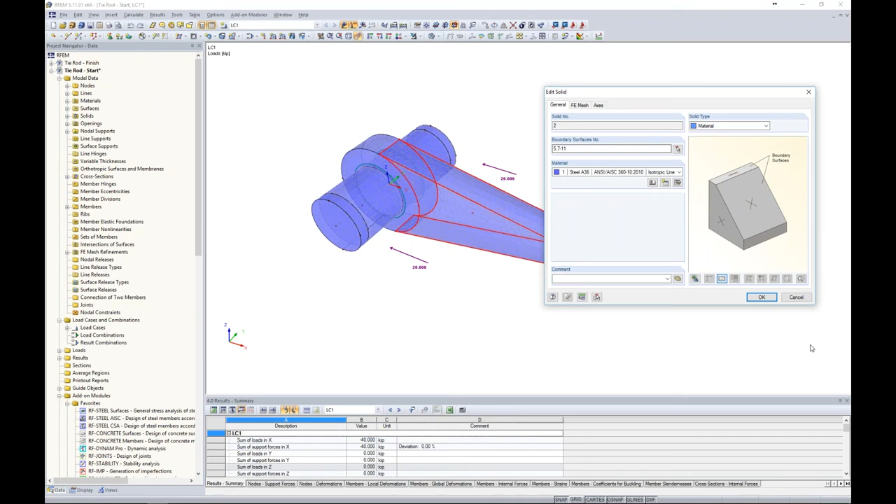You really can have any shape that you would like for solid and surface elements. The bolt passing through the ring of this tie rod is also modeled with solid elements, and we even have our ring defined by an additional solid element. So what we're trying to emulate here is this bolt passing through the tie rod ring, and we have a load placed on either side to represent tension within that bolt.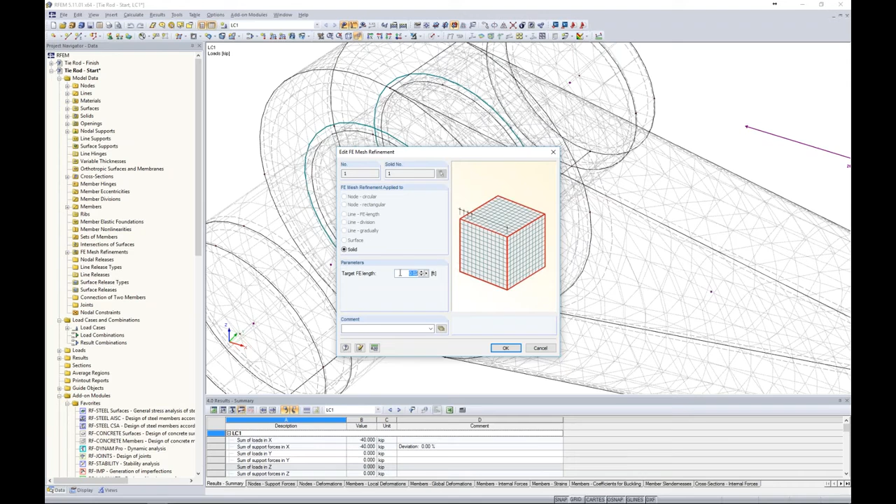We want to look at our FE mesh refinements here. Under calculate, FE mesh settings, the global mesh settings are set to 0.03, which is about 0.36 inches, so something very small for this type of model. You'll notice this cube within the center here — this is another FE mesh refinement. Just like I pointed out before, we can apply FE mesh refinements to solids. I set something slightly smaller at 0.02 feet, and the program will automatically generate this FE mesh and tie everything together so we don't have to worry about any of that manually.

Now that we've discussed what type of elements are going on here with this tie rod, let me turn this back into a rendered view. We want to run our analysis. In reality, when we run our analysis, we should take a look again at the deformations. That's kind of always my advice — viewing if we're seeing our expected behavior.

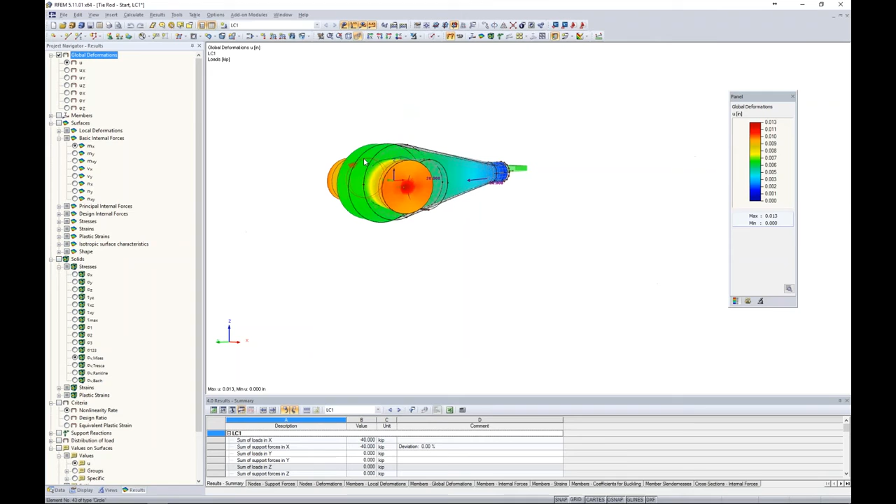So with this bolt element passing through the eye, if we turn this into elevation view and into wireframe, we can see that it looks like the bolt is fully fused to the front portion of this ring element. This is not really what's going to happen. In reality, we would hope that this bolt would release away from the ring element where we have tension forces, but in the back we would still have full fixity where we have compression, where the bolt's bearing onto the ring. So how do we exactly take that into account?

Let me turn off the results here and go back into a rendered view. I'm going to turn off my FE mesh under my display tab — we can scroll down to quickly turn that off with a checkbox. So here is all of my input data. As I mentioned before, every solid element is composed of surface elements on the exterior, so here's a surface element. We can view all of these surfaces available in our data project navigator. All of them are set to null, which means they have no stiffness — they're not playing any importance in the analysis. They're just boundary surfaces for our solid element.

But as I scroll through these, I'll notice surface number 3. Surface 3 is the shared surface between the bolt element and the ring element, so this is where we need to have some influence on the connection between those two solid elements. Let me create a visibility by the selected objects. I'm going to scroll in here and right click under the surface to turn on the local axis system. Looking at the local axes of this surface, you'll notice my local X and Y coordinates — that's translation, left to right, front to back — and then my Z coordinate, which is normal to the face of this surface.

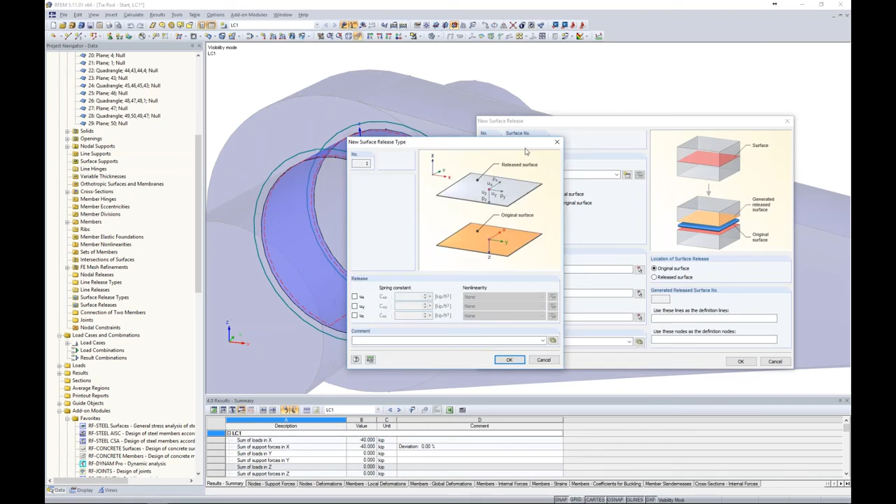Over in the project navigator, if I scroll down slightly, I'll see surface releases, and this is where I want to right click and create a new surface release. The program asks which surface I'd like to apply this to, so I can graphically choose surface number 3, type it in, or choose from the drop-down box. I need to define the surface release type by choosing my option on the right, and up pops an additional dialog box showing my 3 degrees of freedom — translation in X, Y, and Z. I'm going to activate all 3 of these. So this is my surface release type: in the local X and local Y directions, I'm going to apply a small partial fixity.

That's because we're going to have some resistance of this bolt sliding left and right, front and back. So we'll do the same thing for the local Y axis. Then we have our local Z axis here. And again, sorry, I forgot to reiterate that these are lowercase x, y, and z, not to be confused with global x, y, and z, indicated by a capital X, Y, and Z.

So for the translation direction in the Z component for this surface, I want to set one of these nonlinearities, and the option I'm going to choose here is fixed if positive uz. So when I have any forces in the positive direction of this surface, I want full fixity between whatever objects I will soon select. But whenever I have tension forces in between, maybe my bolt and my ring element, I want that release to kick in and we'll no longer have transmission of any forces in that direction.

I click OK. So what is happening here with a surface release? Well, this picture indicates what's going on. This pink surface is actually my surface number 3 here, and the program will internally create an additional surface to apply that generated release surface. So it's something internally that's going on within the program.

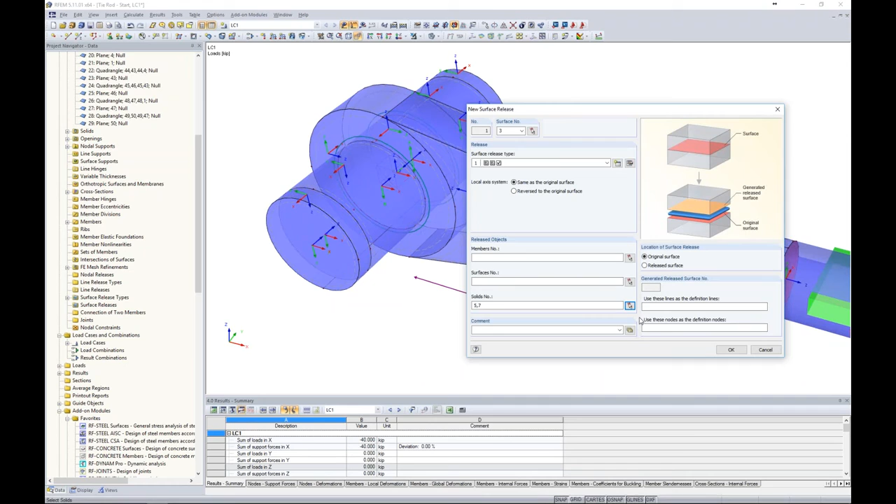I only have solids 5 and 7 defined here. I click OK. First, I'm going to zoom in here, right-click to turn off my local axis system. Just like what we saw with our surface elements, we have all of our solids listed here as well. So I can just scroll down, and finally I find solid number 4 is the additional solid I would like to release. So what I can do is choose my surface release from my tree here, where you can see a faint dotted line representing that surface release as well. I double click on it, and I can just type in comma 4. I click OK. So now we've applied that surface release, and let's rerun our calculation.

So you can see down here our status - the program is creating all of our FE mesh elements. Again, it takes a split second longer. Number one is because we have quite a few FE elements, not only for our surfaces but we've introduced solids, so throughout the depth of the solid we have FE elements. But we've also introduced a nonlinearity with that surface release, so the program must determine what's tension and what's compression between the bolt and the eye. Once this is done solving, we will see our results presented to us directly in RFEM again. And it's almost done.

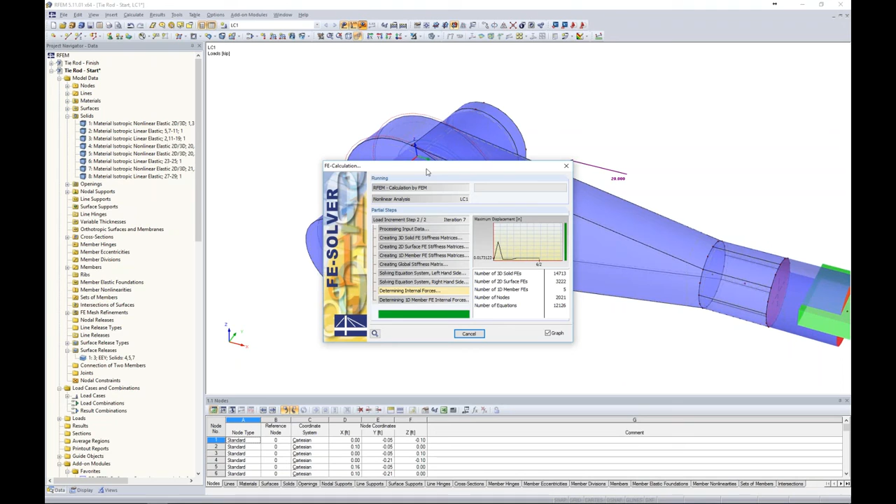Okay, so now we are taking a look at the deflected shape. Again, my recommendation is always jump to that deformation here when our results are presented to us. Let's turn this into a wireframe view, and now we can see much better behavior between that bolt element and the ring of the tension rod. So what we see here is that when we have those tension forces, I actually have a small gap here, but if I rotate it to the back I'll see full compression where that bolt's bearing onto the ring element. It looks like all of those forces are being transmitted.

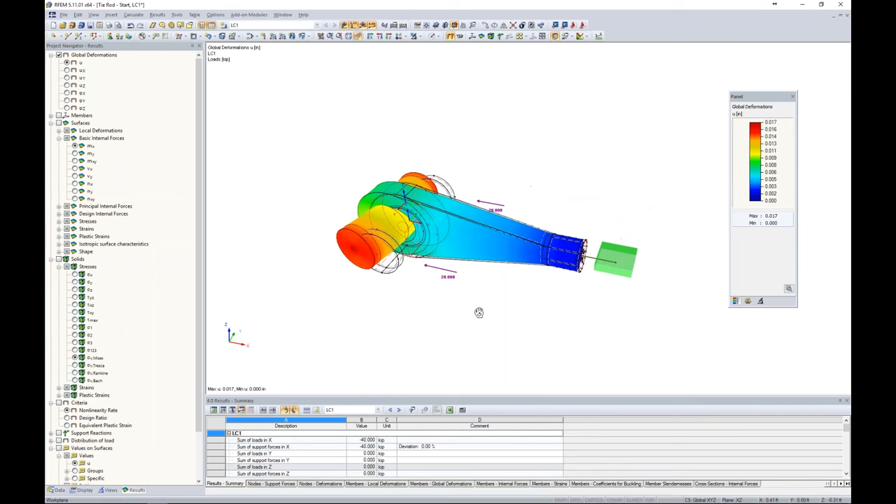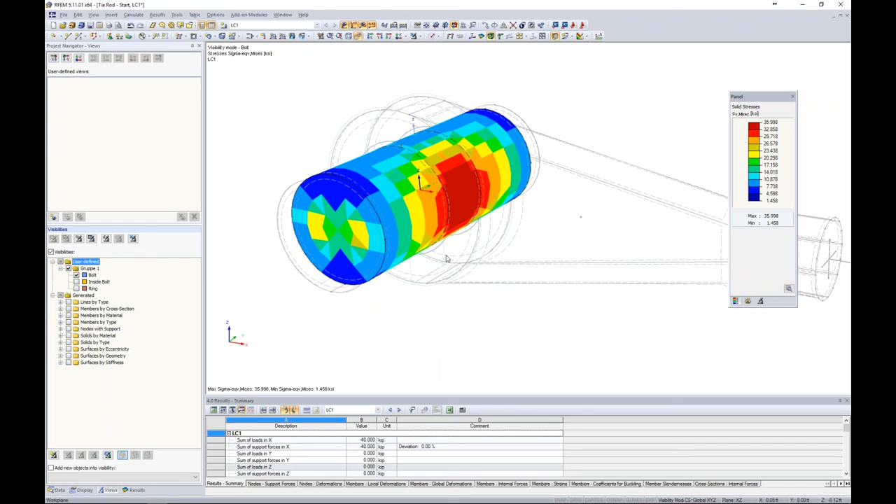Now that's fine for the deflection, but maybe we want to double check everything with our stresses. So for this, I'll take a look at my solid elements and in turn my von Mises stresses. Jumping back to my views, I want to activate maybe just my bolt element here. This is going to confirm that we have pretty high tension stresses up here at the front of the bolt, which makes sense based on the deflected shape and the loads we've applied. If we rotate this to the back, we have much lower stresses where this bolt is bearing onto the eye of our ring here, where that will help with this overall stiffness.

So taking a look at the ring element, same type of concept. When I look up here at the front, I have relatively low stresses, and that's just because I don't have that bolt element bearing on the ring anymore. But at the back side, and the top and bottom, I have much higher stresses where we begin to have contact between those two solid elements.

Now, the other thing to notice is that under the bolt, maybe we're interested in viewing what our stresses are along the depth and length of this bolt. With solids, it's sometimes hard to tell what's going on externally, but what's going on within the inside of this solid element? That's where we have something called a clipping plane.

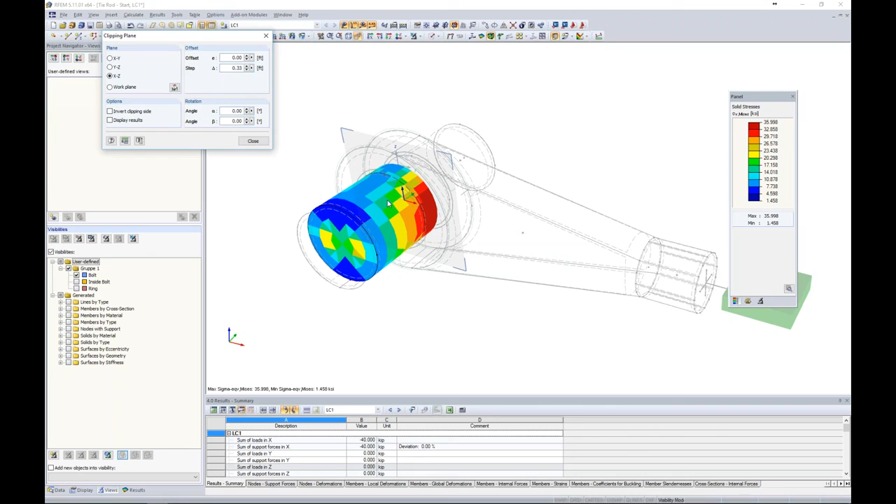So under Insert, Clipping Plane, you'll notice that we're immediately slicing this solid element in half, and we can invert the clipping plane so that we're viewing the other side. Here we can set a certain step, something pretty small like 0.05.

Now as I toggle through these eccentricities, I can actually see what's going on within the depth of the bolt element. I'm probably most interested right here in the center where we have the most activity going on with our stresses. So that's something you can easily utilize for either solid or surface elements if you're interested in knowing a little bit more of what's going on internally within these elements.

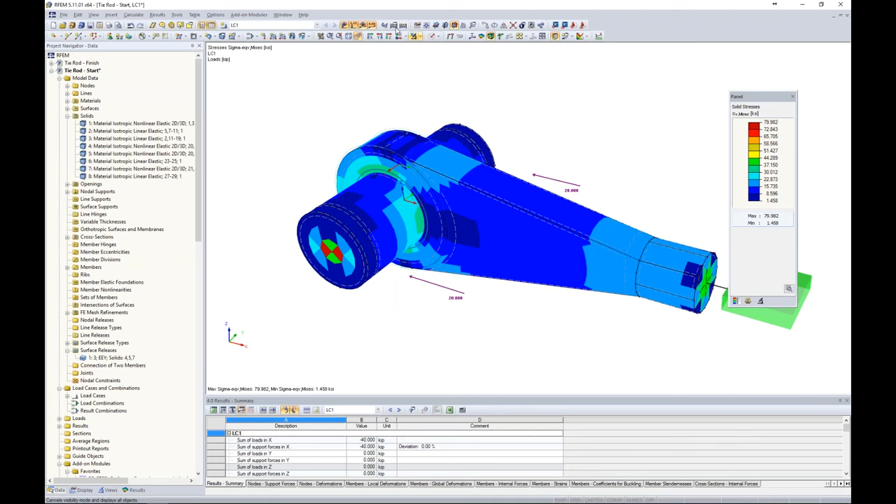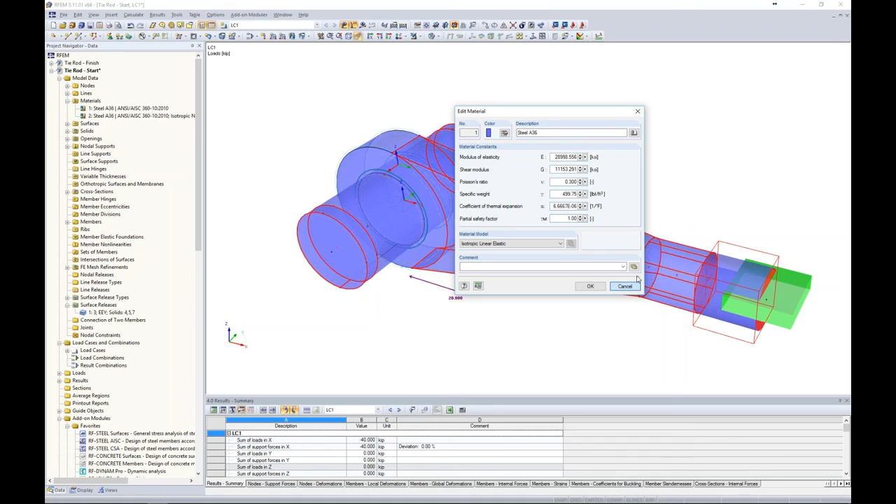My materials are listed here of what I'm using within the particular model. The first one is steel A36, that's the front portion of this model as well as the two end solids for my bolt. When I double click on this, you'll notice the material model is just set to isotropic linear elastic. So any linear elastic material is already included within RFEM, that's fine for this front portion of the model.

Now as far as the rear portion of the model where I'm most interested in this connection, I double click on the material. You'll notice that I changed the material model to isotropic nonlinear elastic. So any nonlinear elastic, plastic, and so forth, that is where that add-on module RF-MAT NL will come into play. That will release all of these various options to do a nonlinear material analysis.

So for example, you can see here in our details, which if this opens up - I don't know why there's a little bit of a lag time, it must be the FE elements - but we can see here the yield strength is set to 36 KSI, more or less just from our steel A36 material.

So now when we take a look at the model and we ran our analysis, which we just saw, we can turn back on our results and take a look at maybe our view of just our bolt. Again, nothing is going to be above this 36 KSI. So what's happening is the load is being distributed on these FE elements. The minute that FE element reaches the yield strength, the load will be distributed to adjacent elements until that is a fully complete process.

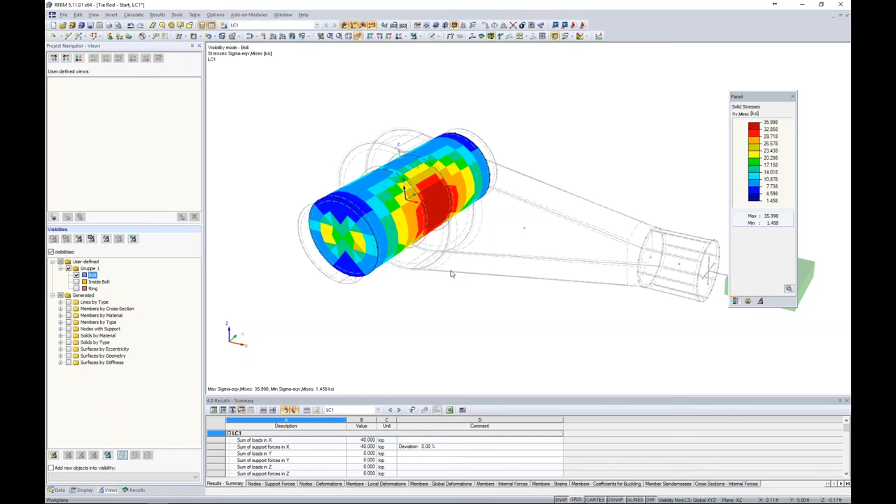Okay, so that concludes the webinar for today. I know that was quite a bit of information, but keep in mind, almost everything entirely that you saw today is just our main program, RFEM, without touching any of our add-on modules.